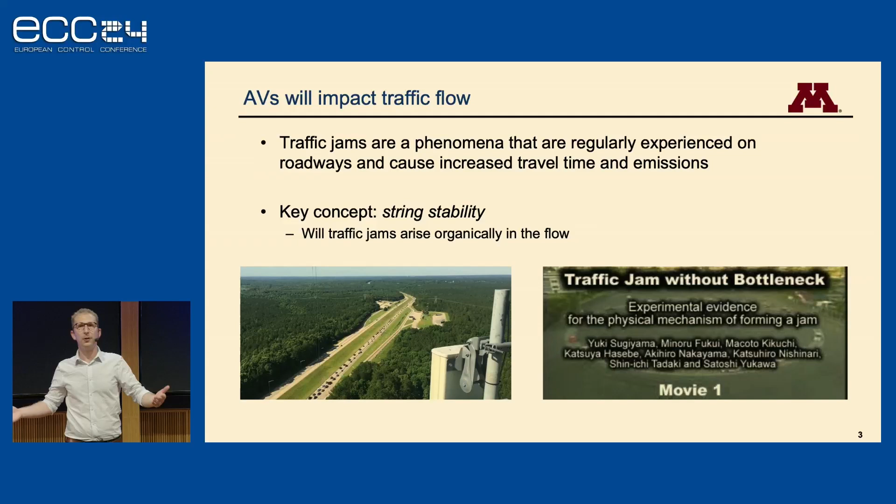We see them here on the left, happening on an open road in the wild, as I like to say, and then on the right in an experiment. You might have seen this video before. It's a group of researchers in Japan. I love this. Traffic engineers were debating over whether or not these phantom traffic jams were real things.

A group of physicists said, let's just do an experiment and see what happens. And so they came up with this setting where you have sort of no external factors. It's just pure traffic. Infinite traffic. It's a ring of 22 vehicles. They start at the same speed, same spacing, so at like an equilibrium flow, and relatively quickly the stop-and-go wave emerges. And what's really happening here is what we call string unstable traffic.

And the question of string instability is what happens to small perturbations from an equilibrium flow. The equilibrium flow here being all the vehicles driving at the same speed and same spacing, so 0 acceleration, and then you see one perturbation. I think there's a common misconception. It's not the question of what happens to the individual vehicle. Naturally, any reasonable driver is going to return to their original speed, keep driving. That's not the question of string stability. That's sort of maybe some sort of asymptotic stability of the driving.

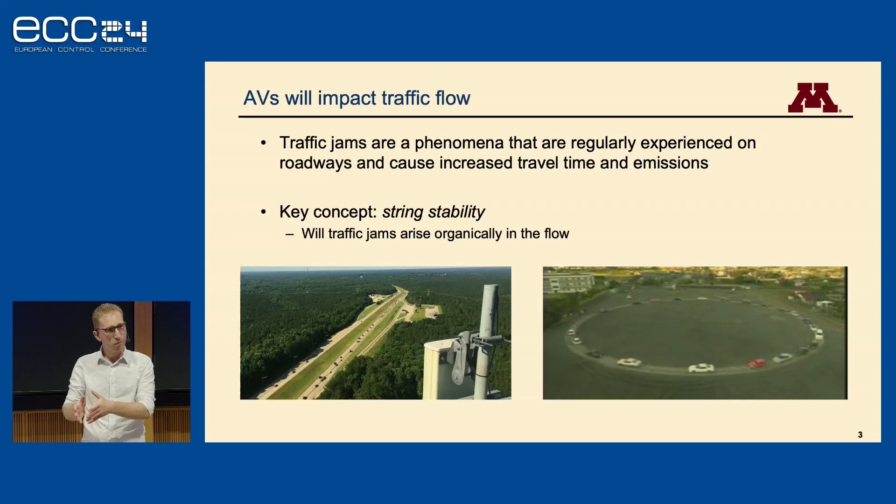The question of string stability is what happens to the perturbation. And so in string unstable traffic, you can imagine that initial small perturbation amplifies from vehicle to vehicle, even though each vehicle originally goes back to that equilibrium flow, the perturbation amplifies, as opposed to string stable traffic, where that initial perturbation is going to dissipate.

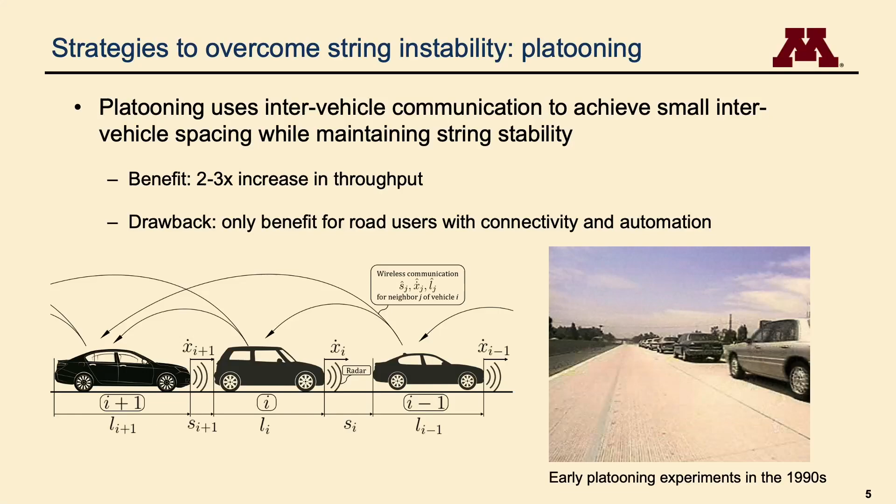And the benefit here is really clear. These vehicles can drive much closer together, can brake very suddenly, so safely do that. You see 2 to 3 times increase in throughput. From a traffic or transportation management perspective, that's amazing. You've basically built a road on top of a road on top of a road without actually building any new road. Without paying for any new construction, you use technology alone to triple or double your capacity.

That's huge. But the drawback, and this sort of gets at my overarching theme here, is it's not for everyone. It's for those who have platooned vehicles. And in fact, one of the ways to address this, if this does happen, there's a lot of proposals for dedicated lanes for platooned vehicles, which is great, again, if you have one, but not necessarily great if you're just a regular person stuck in your regular car like I am.

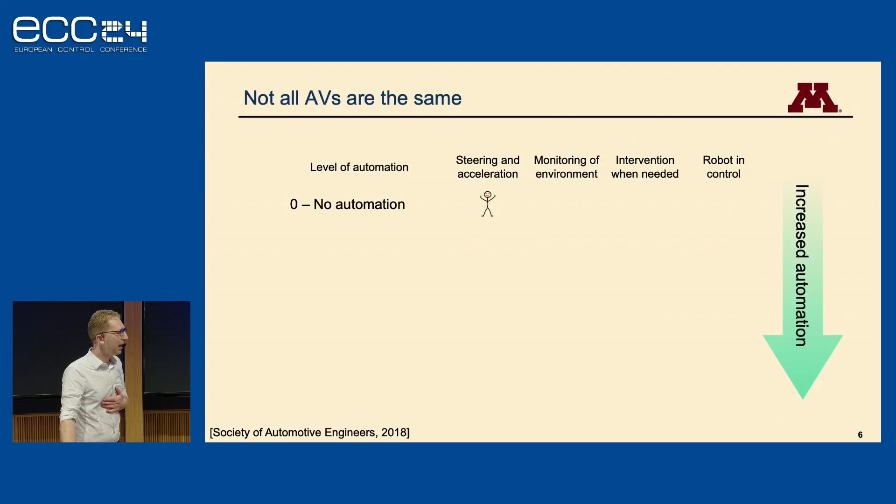So I think this is an important time to differentiate between different types of automation. I've used the term automated vehicle very loosely in the first 5 minutes here, but I want to define that a little bit more concretely. You may have seen this before, but there's basically 5 different levels of automation. There's level 0 automation, so I guess 6 in total. That's what I personally drive. That is your regular car. So steering, acceleration, that's the human driver. Monitoring the environment, that's the human driver. If something goes wrong, I'm there to slam on the brakes or swerve to avoid hitting something. There's no robot in control.

As we go to low-level automation, level 1 driver assistance, we start to take some of those driving tasks and hand them over to the vehicle. And as we go up to higher and higher levels of automation, we're handing more and more of those driving tasks over to the vehicle in more and more driving contexts, so in more and more situations. All the way up to level 5, full automation. This is where I think a lot of those benefits are being talked about. That's sort of the Google car. There's no steering wheel anymore. You tell it where you want to go, and it takes you there.

OK, so while these higher levels of automation may happen a little further down the line, they're not really here yet. And so the first question I want to look at is, what's going to happen with these lower levels of automation? How will they impact that general traffic experience for all drivers on the road? And then how do we address that with lower levels of automation? Specifically, I'm really interested in levels 1 and 2. A lot of people say, well, these are kind of boring.

They've been around for a while, things like adaptive cruise control. Again, you're taking some of that driving and handing it over to the vehicle. And the question is, how does adaptive cruise control impact string stability? Now, if you had attended ECC maybe 15 years ago, you would have probably seen a talk that says adaptive cruise control is very easy to make string stable.

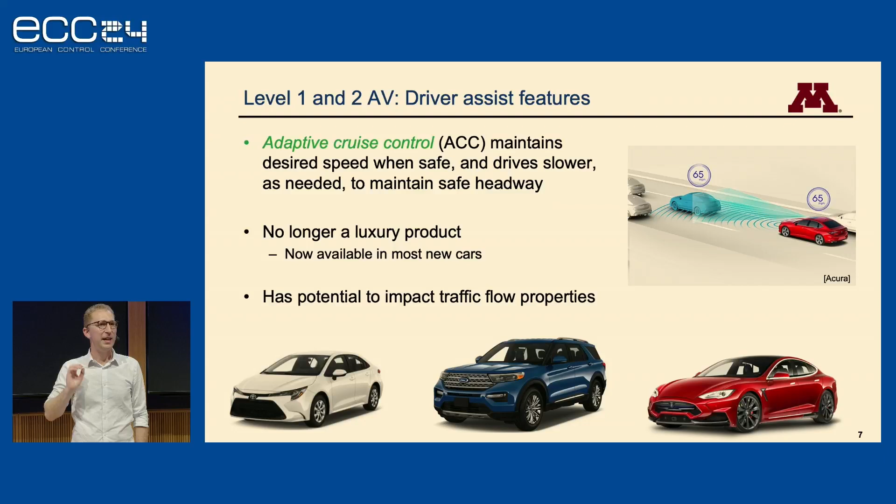There's a rich body of literature going back to the 90s, really, that looks at string stability and adaptive cruise control. And it turns out that these systems are relatively easy to make string stable. So they will not amplify perturbations, and they will nicely dissipate perturbations.

OK, so the first question that I had a couple years ago was, OK, but when I rent a car with adaptive cruise control, I don't like the way it drives. I don't actually think it's doing what the literature says it ought to be doing. And so in order to ask that question of how will these vehicles impact traffic flow, we need to first be able to look at a vehicle and say whether or not it's string stable based on its behavior.

I'm going to just go through a little bit of background on traffic modeling and background on string stability analysis to have the computational mathematical tools to be able to analyze these vehicles for their string stability behavior. So in order to model traffic flow, engineers love these things called microscopic car following models. You might just think of them as an ordinary differential equation that describes the acceleration of a vehicle as a function of the state.

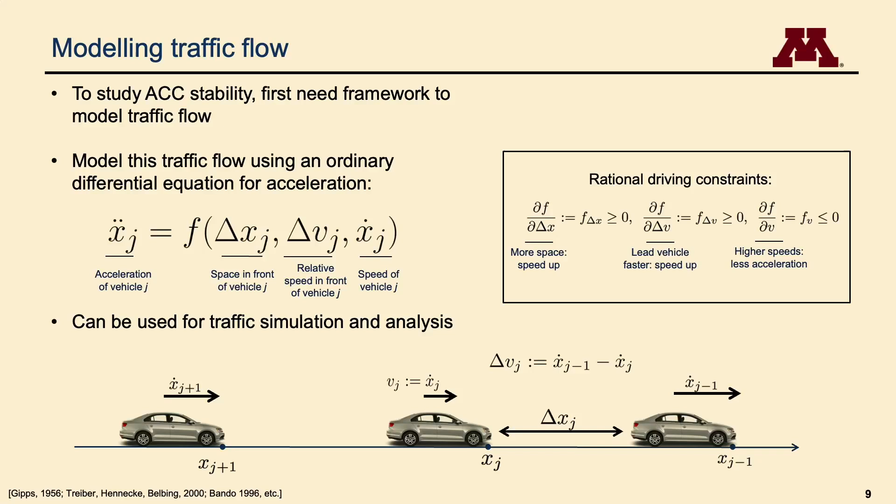And the state is the inter-vehicle spacing, the spacing between the vehicle that we're looking at and the vehicle in front of it, the relative speed, so the rate of change of that spacing, and the speed of the following vehicle itself. And for vehicles that drive like normal vehicles, they slow down when they get closer to the vehicle in front of them, et cetera, it turns out that we can look at that equilibrium spacing, where they all have the same speed, same spacing, i.e. no acceleration, and look at what happens with a small perturbation from that equilibrium spacing, and we can look at how that propagates from one vehicle to the next.

What we're going to do is basically linearize around that equilibrium and then observe what happens to that perturbation. And skipping a couple of steps, it's relatively straightforward, but we get to this really nice result that says that if we look at just the partial derivatives, if you're comfortable with a linearized stability analysis, we can very easily compute whether or not this particular vehicle is string stable. All we need is the car following model that describes the vehicle. If we have that, we can easily run this stability analysis and say whether or not it's string stable.

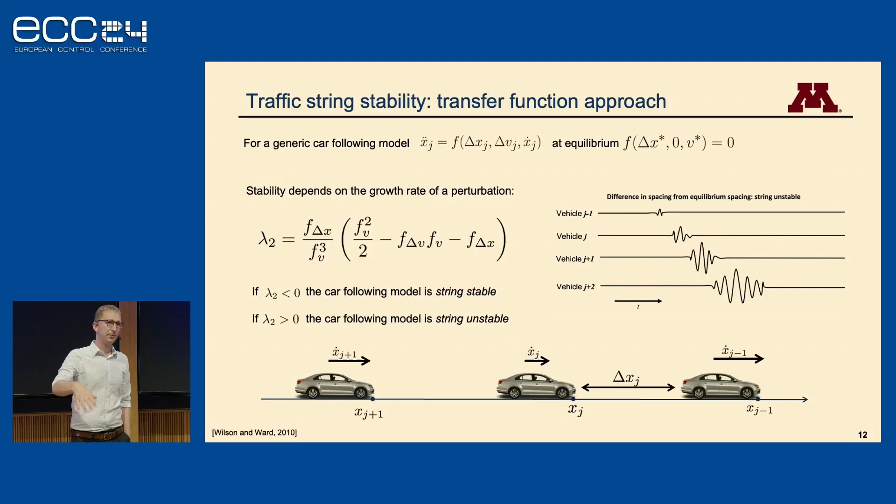So the next thing we need to do is build car following models for these vehicles. The idea is basically not to capture what's programmed on the car, but to capture how the car actually behaves, right? And there's a difference there. There's a lot of nonlinearity in things like the engine, the transmission, et cetera. And so even though the car might be programmed with a certain PID or maybe more fancy control, that's not necessarily the behavior that we observe. So we need to come up with a model that nicely describes that, and then calibrate that model based on real driving data.

OK, so the model that I'm going to use here is one that's really common in the literature. It's an optimal velocity model with a relative velocity term. Some people call it a constant time headway model. If you learned to drive and were told to always leave a 2-second time gap or a 3-second time gap between you and the vehicle in front of you, you learned this model effectively, right? You learn to keep a 2-second rule.

And if you look in the literature on adaptive cruise control, a lot of the controllers are based on a constant time gap policy. So this is a pretty common assumption. We collect a bunch of data on this. So what we do is we have a lead vehicle that drives and a following vehicle that follows with that ACC turned on. And it's just following the vehicle in front of it with its adaptive cruise controller.

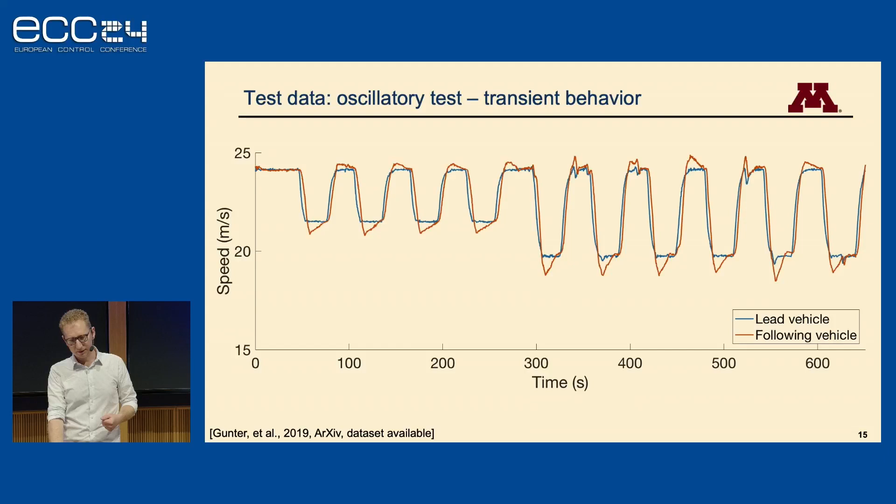We get GPS data for the lead vehicle and the following vehicle, and so we can see the spacing, we can see the speed of each vehicle, compute the relative speed. So if you look at the data, you see small speed fluctuations for the lead vehicle, you see what the following vehicle does, and then for another example, and then you can calibrate this type of model.

And I've done this for probably about 8 or 9 different vehicles at this point. And when you look at the calibrated models, you can then look at the string stability of those models, and it turns out that basically all the vehicles I've looked at are string unstable. So that's the best way I have to convey that.

There is a little bit of good news here, and that is that I've recently looked at a couple of electric vehicles, and it turns out that for those vehicles this is basically not true. Those things are as close to string stable as anything that I have seen. I have some speculation as to why that is.

I think part of that is you're cutting out a whole bunch of nonlinearity in the engine dynamics and the transmission dynamics. You also have basically full torque instantaneously. And so you can much more precisely drive these controllers that were intended to be string stable. Though I'm open to discussion and learning if somebody has a better hypothesis.

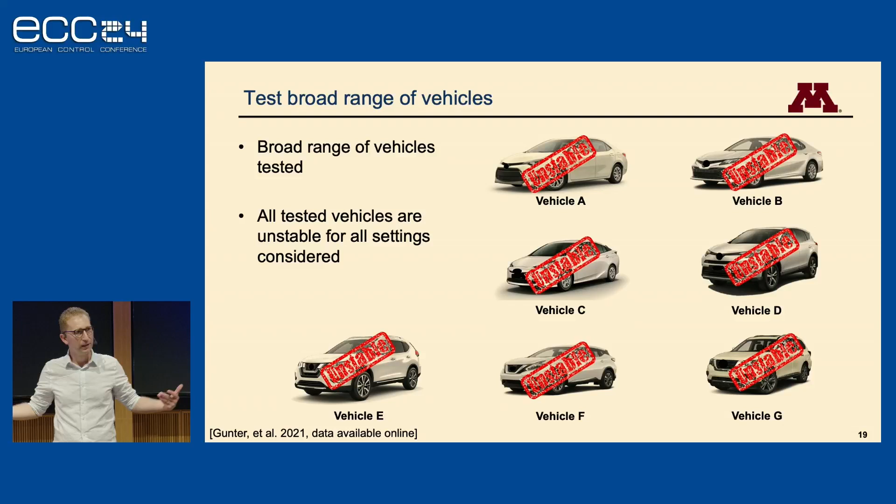OK, so now let's get back to the big question of what does this mean for everyone in the traffic flow? What does this mean if you're driving in the traffic flow, you don't have an adaptive cruise controller, you didn't pay up to get that feature, what does this mean for you, right? What does this mean from a general population perspective?

So we can look at this in simulation. We have now built these very accurate models that nicely describe how they behave. So let's look at what happens in simulation. We look at both the theoretical, what the literature says adaptive cruise control and automated vehicles ought to behave like, and the models that represent the realistic car following behavior of real adaptive cruise control vehicles.

In order to understand these, I'm going to go on a small detour into a little bit of traffic flow theory. Again, this is a tutorial, so I'm trying to bring in some ideas that maybe you've seen, maybe you haven't. But to describe traffic flow and traffic behavior, we look to the 1930s when Bruce Greenshields, at the University of Ohio, had this idea that the speed that traffic is traveling at ought to depend on the density of vehicles on the roadway.

Now, this was the early 1930s. There were not a lot of vehicles on the roadway. So he went out and collected data with a camera where he took pictures to estimate how fast the vehicles were going and what the density was. And he got a lot of low-density measurements and one high-density measurement. And he did what any good engineer does: he drew a straight line between them. And he came up with this speed-density relationship.

Now, flow is speed times density, which means that if you have a linear speed-density relationship, you're going to have a quadratic flow-density relationship. Most engineers, though, looking at data, say it's probably something closer to triangular. But either way, at different densities, you have different flow.

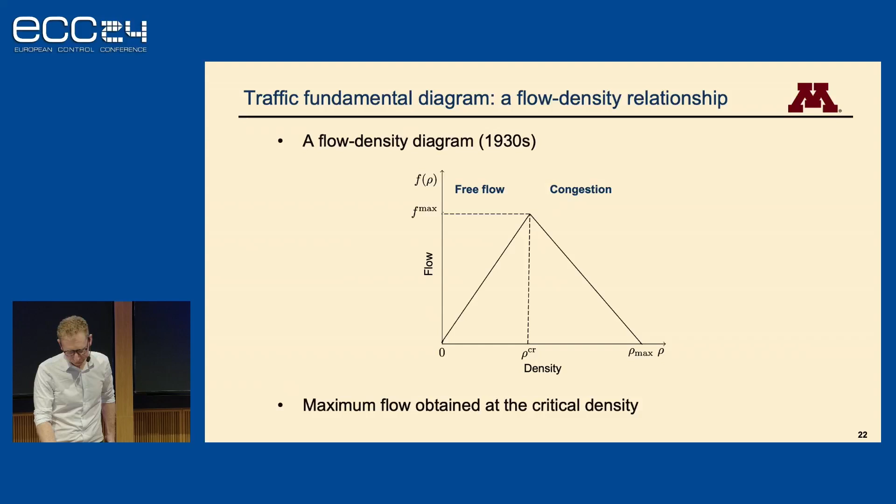OK, so with this in mind, I want to look at fundamental diagrams for different market penetration rates, or different percentages of vehicles with different types of automation, and see what happens. If we look at fully automated vehicles, it's hard to tell, but you do see a small increase, and that is consistent with the literature. These are models that behave like what we are told to expect fully automated vehicles to behave like. And sure enough, we see an increase in capacity. If we look at the adaptive cruise control vehicles, so this is 0%.

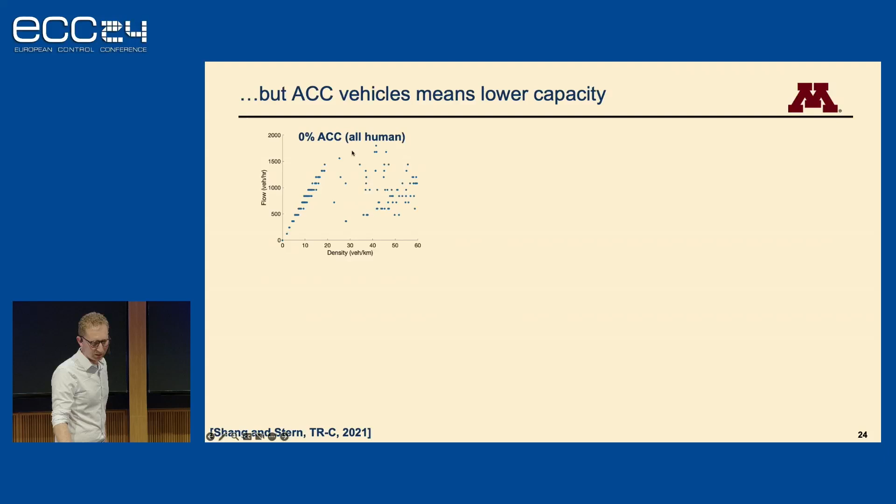This is all human-driven. This is sort of what you would expect. We see our nice free flow regime, our congested regime, and a capacity somewhere around here. And if you look at higher percentages of commercially available adaptive cruise control vehicles, what you see is two main things. You see sort of a collapse of that fundamental diagram, which means that the maximum roadway capacity goes down

by maybe 20, 30%. And the critical density, i.e. the density at which congestion sets in, moves to the left. So at lower densities, because these things are quite conservative, we start to see congestion arise. So that's quite different from the promise that I made of 2 to 3 times capacity with these vehicles.

OK, so the next thing is I want to sort of review what's been done to get towards that. And so the idea is we want to drive the AVs to be better. Right? We want to drive them so that they improve the traffic and don't necessarily make it worse. OK, so in order to do that, we need to come up with a model. And the other thing that we want is we want them to drive not too differently. If they drive too differently from humans, they're going to do something that's weird.

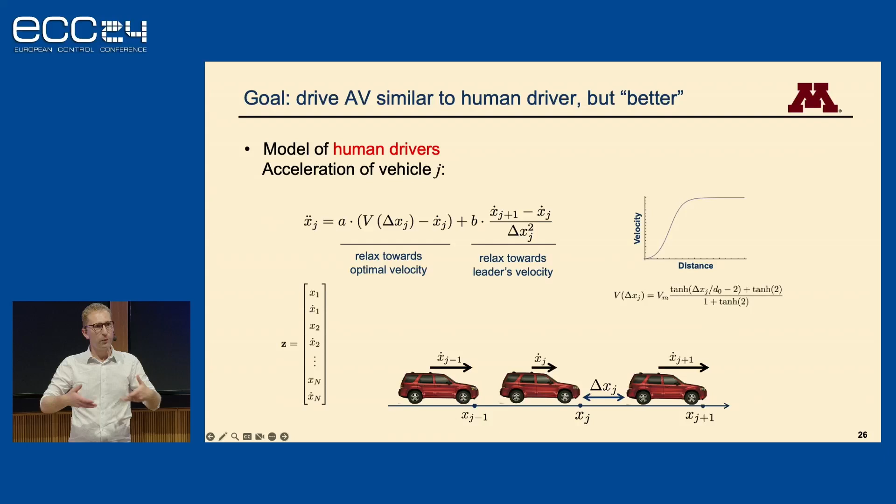So we're basically going to start with how we observe humans to drive, and then just add a feedback control term. So this might seem like it's cheating. This is pretty straightforward. To drive with some desired or equilibrium speed. So we want to look at what's the average speed of traffic, and then we want to kind of maintain that speed.

And if you look at that same ring road scenario that I showed you originally, this is actually a really straightforward sort of intro to controls type problem. It just becomes pole placement, basically, right? You pick your gains, and you're off to the races. OK, and it turns out that this is a really easy stabilizing control. And if you implement this in simulation, this actually works really nicely.

So on the left-hand side, well, all the vehicles are the same. And you'll see that relatively quickly, those same stop-and-go waves emerge. It's just because we've calibrated those vehicles to drive like they do in reality, or observed. On the right-hand side, that blue vehicle is autonomous capable. Currently, it's switched off, and you see those same waves emerge.

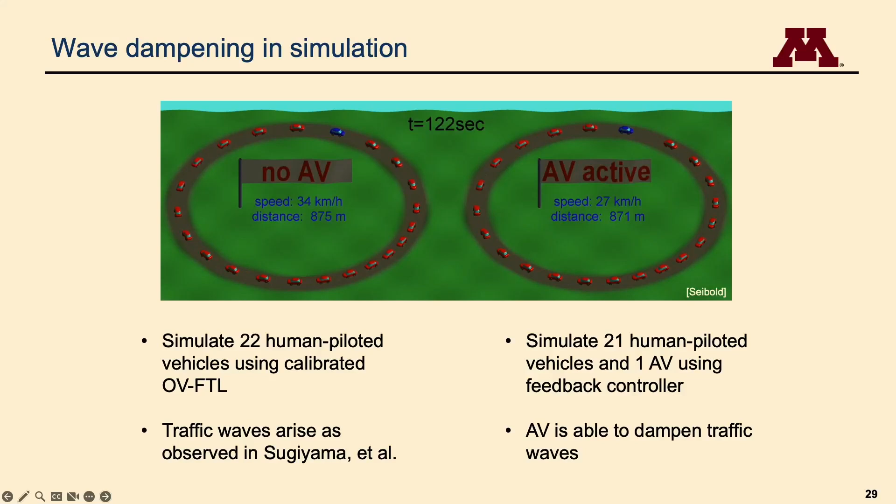And then in a couple seconds here, we're going to switch it on. And you'll see that it's going to drive with that feedback controller that we saw a minute ago. And it's going to relatively quickly stabilize that flow of traffic. And so now we've turned on the AV. And what you see is it got turned on at a very opportune time. And so it didn't race to accelerate to catch up with the vehicle in front of it. Instead, it sort of slowly accelerated towards its desired speed and then stayed at that.

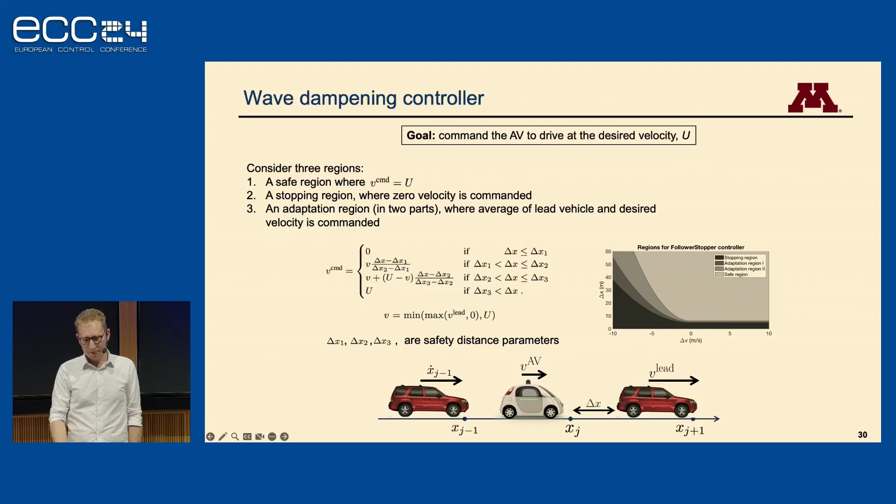OK, the reality of how to implement this on an actual vehicle is a little harder. You can't quite do that. And so a couple years ago, I worked with a number of folks, some of whom I believe are in the audience, to design controllers that could actually be implemented on actual cars. One of the challenges is that on most vehicles, you can't implement an acceleration. Those are all acceleration controllers. Most of what you see in the literature is acceleration-based controllers. But you have to implement a speed. But we were able to come up with something that, in spirit, really captures the same behavior.

And the result, I'm just going to show you the video that describes this, is we redid that ring road experiment. Very similar to the simulation I just showed you. The vehicle with the arrow on top of it is autonomous capable, but it starts without autonomy. So it starts as a human driver. The speeds are at the bottom. Relatively quickly, those stop-and-go waves emerge. At this point, we've activated the autonomous vehicle controller, and it very quickly is able to do what it did in simulation and smooth the traffic.

And so when we look at the results, at the top we have what traffic engineers call a space-time diagram. It's just the trajectory plots of all the vehicles. You can see very nicely here where those stop-and-go waves emerge. And then once we've activated the vehicle, we have that smooth flowing traffic. And this has pretty big implications. This is back towards improving the traffic for all. We've changed the behavior of one of the vehicles on the road.

And we've then changed the traffic flow for everyone. On that experiment, we actually had little sensors on each of the vehicles that measured the onboard OBD2, onboard diagnostics. So we're getting real-time fuel consumption information from each vehicle. And the reduction in fuel consumption was kind of surprising.

So unsurprisingly, you see a small increase in throughput. On average, the vehicles are going faster. You see a decrease in braking, which is sort of like a proxy metric for safety, right? Harsh braking events mean that if you hadn't hit the brakes, you would have had a collision. But what was really most astounding to me was the reduction in fuel consumption. We saw a nearly 40% reduction in fuel consumption.

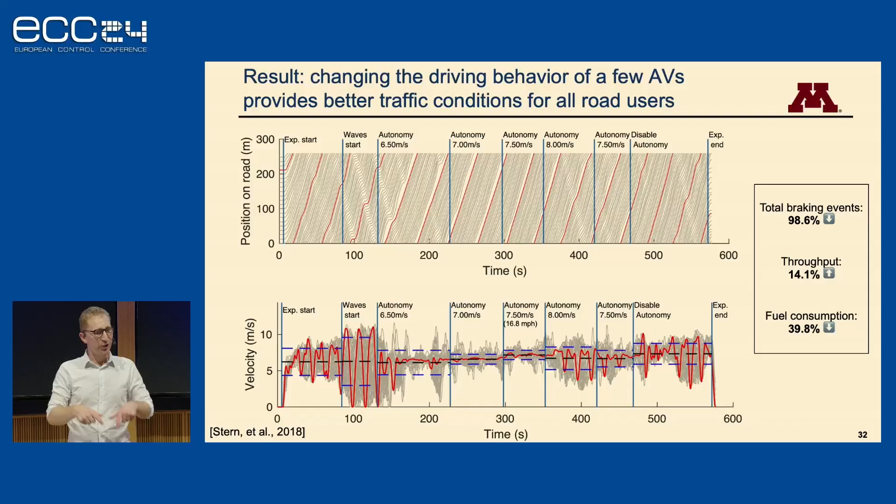OK, I've got about 5 more minutes, but I should probably leave a couple minutes for questions, right? OK, so the next thing is, what about our legacy infrastructure, control infrastructure? Traffic flow will change, right? Whether it's ACC vehicles or highly automated vehicles, traffic flow will change. Our control infrastructure is built for a certain type of traffic flow behavior. How do we modify that to stay relevant and provide benefit not just to the people in the automated vehicles, but to all the road users who are using the highway?

And so the vision that I want to briefly present here is we need to fight congestion with the AVs we have, not the AVs we want, right? So ideally, we would be able to somehow observe what the traffic dynamics look like, so who's in the flow, then, based on the current makeup of automated and human drivers, what do we expect that fundamental diagram, that flow density relationship, to look like?

And then whatever control infrastructure, here I've shown ramp metering control, but whatever control infrastructure you're interested in, you can then modify based on the current observed flow density relationship and not some static flow density relationship that comes from the last 20 years of observations, which is what's done today. OK, in the interest of staying on time, I'm going to go a little faster in the next couple of steps, but I'm happy to answer any questions at the end.

OK, so let's imagine that we can do this. This first part, just imagine we can do this. We can look at the flow based on how they're driving, identify what type of vehicle they are. Are they automated or are they human driven? There's a lot of ideas for how that might happen. But imagine we know that X percentage, 20%, 30% of vehicles are automated, now what?

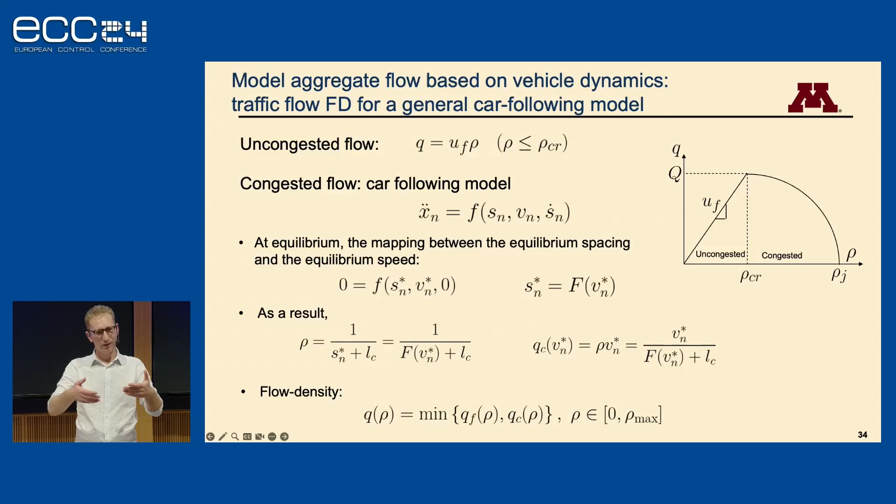So we need to be able to come up with some sort of joint flow density relationship for that composite flow. We can look at an average density based on the fraction of vehicles of each type, and then, and I'm going to skip through this relatively quickly, come up with a combined flow density relationship where the flow depends not only on the density of vehicles, like it does now, but also on the fraction of vehicles that are automated.

So what we have is effectively like a three-dimensional fundamental diagram. We have a flow that depends not only on density. So if you slice it right here, that's just your standard flow density relationship, but it also depends on the market penetration rate of automated vehicles. In this case, I've represented it for ACC vehicles, so it kind of decays. But if you imagine fully automated vehicles that we might have in the future, this would increase with higher penetration rates of automated vehicles, right?

And so now, as an example, let's just take your standard ramp metering control. That's a pretty standard control.

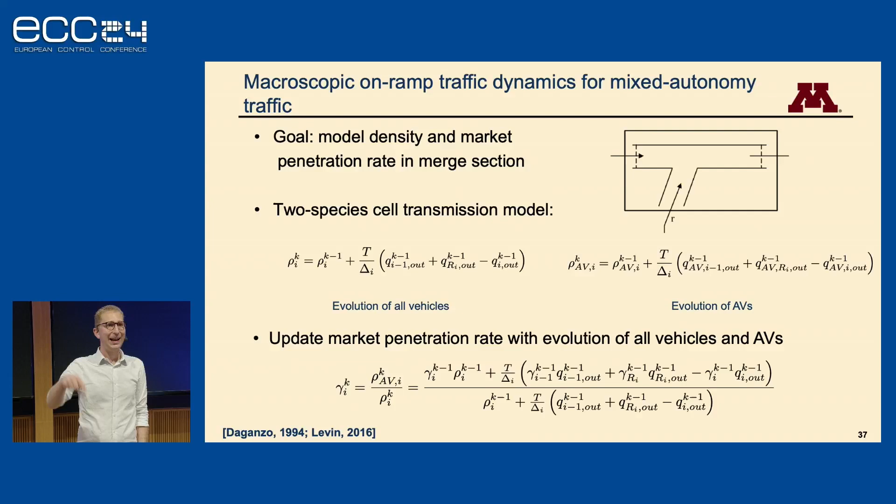And modify it to not just look at a static target density. The idea behind ramp metering control is basically that it's a feedback control where we control the on-flow of traffic such that the resulting downstream flow rate is at or below the critical density, that transition density from uncongested to congested traffic. And instead of looking at a constant critical target density, we can look at a target density that depends on the market penetration rate of automated or adaptive cruise control vehicles.

So now we've basically switched this to have a market penetration rate dependent critical density. So I'm going to look at three different scenarios. One is uncontrolled, so that's just allow whatever can get on the ramp. That's no ramp metering. Then scenario 2, which is controlled, but assumes a fixed fundamental diagram. And the third scenario is controlled with a market penetration rate dependent fundamental diagram. We implemented this in MATLAB very simply here. Excuse the graphics. But I think the result is at the bottom.

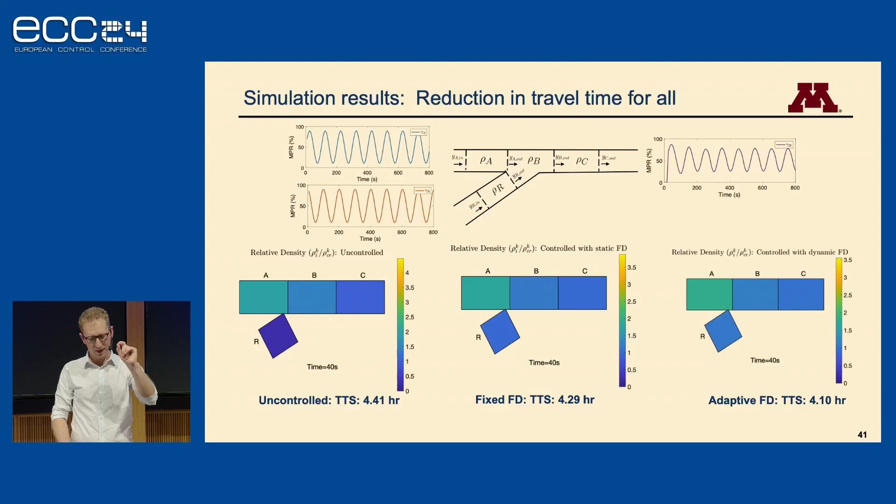So uncontrolled, unsurprisingly, if you look at the total system travel time, or the total time spent, rather, we see about 4.4 hours. And we can reduce that down to about 4.3 hours with simple ramp metering. And we can reduce that down another 4% or so if we look at the market penetration rate dependent fundamental diagram.

And if you look at the densities, you see that basically you go into congestion with uncontrolled, and even with controlled if you're using the wrong static fundamental diagram. But if you use this adaptive fundamental diagram, even that simple feedback controller is able to nicely avoid that congestion scenario.

OK, so in summary, I think increased vehicle autonomy will change traffic flow dynamics. That will have an impact on not just the road users who are in the automated vehicle, but also the road users around them, because they're stuck in the same flow. Remember, you're not in traffic, you are part of traffic. Right? And if other people are driving differently, that's going to affect the traffic that you are part of. So to benefit society, my charge to us is let's think about not just the vehicle occupants, but also the traffic flow around it and how those vehicles impact the rest of the traffic flow.

There's a whole bunch of different games you can play. I showed one example with ramp metering, but I think there's thousands of different examples of how you can think of, OK, how does this change control for traffic systems?

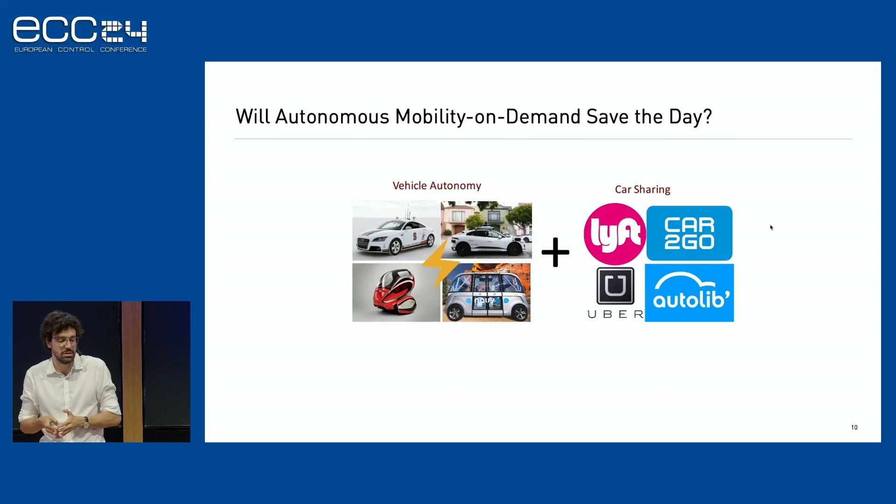So if you combine autonomy, connectivity, and electrification, one of the paradigms that has emerged in the past decade is called autonomous mobility on demand. Autonomous mobility on demand is, very simply said, a fleet of potentially, hopefully electric robotaxis that provide on-demand mobility. And the question is, is this the way to go, especially in urban environments? Will this solve the challenges I've mentioned before?

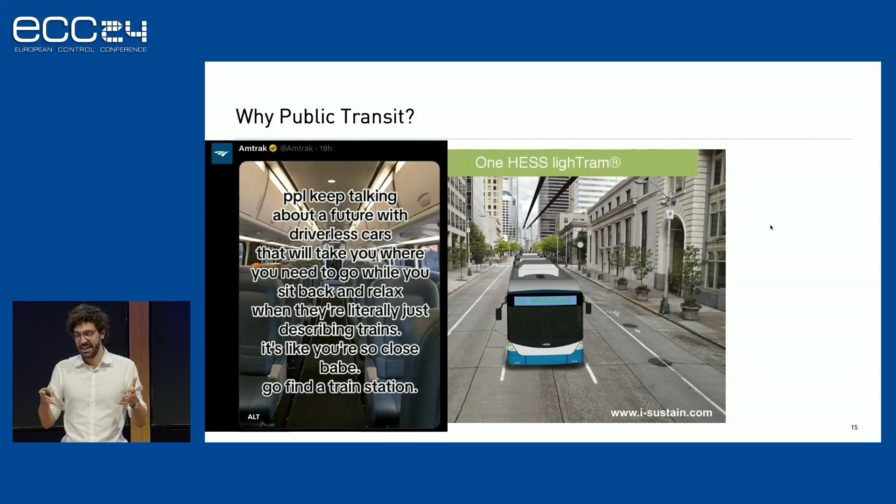However, public transit is not point-to-point. And though it still has these very nice features that driverless cars are promising. This is a tweet by Amtrak, people talking about the future with driverless cars, where you can sit back, relax, and so on. They're talking about trains. You're so close, babe. Go find a train station. Now, if I may say, especially if it's Amtrak, good luck finding a train station. And anyway, it highlights the fact that with public transit you have to go to the train station. So it's not point-to-point. It doesn't pick you up.

There's another dimension, which is the most sustainable way of moving, which is cycling. Actually, I did some back-of-the-envelope calculation the other day to look at the life cycle analysis, so take this with a grain of salt. It turns out that cycling is more efficient than walking, also in terms of life cycle analysis. And it's a great way of moving. It broadens your accessibility range, but of course, not everyone can cycle, and it doesn't cover long distances.

So what I'm hinting at is, why don't we take the benefits of all these worlds and combine them in intermodal mobility ecosystems, which we can call intermodal autonomous mobility on demand systems, where we combine the benefits of all modes within this integrated system. But to understand the potential benefits of this system, we need to start modeling it. And that's what I want to present today in this tutorial.

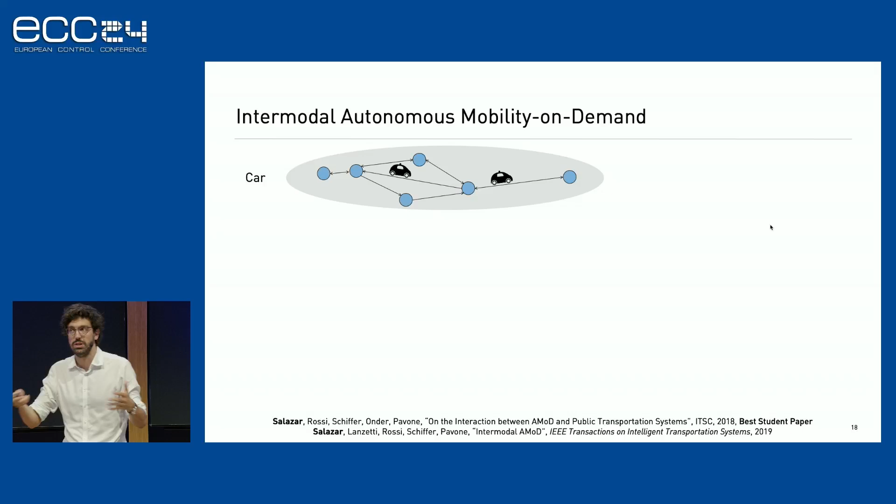The way you can model this system from a mesoscopic perspective for a city is using network flow models. In network flow models, you represent your city as a graph. The nodes are intersections, the arcs are road links. And then you do two things. Since it's a city, you have a lot of flows, a lot of people moving around, so you look at them as fluids, using continuous variables.

Second, we take a planning perspective, which means we look at demand which is time invariant. We look at a snapshot, rush hour, and then you have a continuous flow of users that want to go from A to B, a continuous flow from B to C, from C to D, and so on. It's a steady state. So your metric is users per unit time, vehicles per unit time, because we're time invariant, and again, remember, mesoscopic perspective, therefore we look at flows. Okay?

And you can also add public transit if you want, the same way. Your nodes are the stops, the arcs are the legs in between. You can have also a walking graph, a cycling graph, and then basically model the fact that you can walk, then you pick up a car, it drives you, then you take public transit, right? These nodes may be at the same geographical location, but they're different nodes. And this way, you don't need binary variables telling you whether you're on mode A, mode B, mode C.

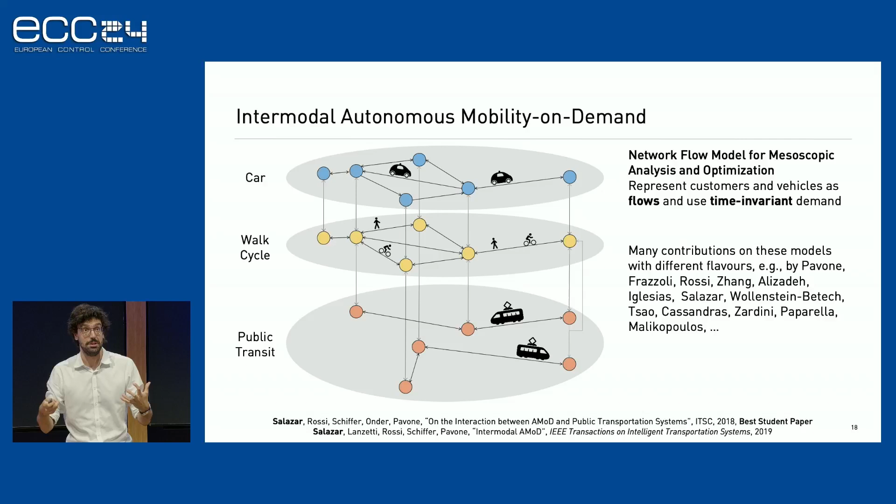And then each of these regions has some demands daily, where people want or need to commute. It can be a hospital, it can be job opportunities, and so on, right? Which we denote with this triple: o_m, an origin node, a destination node, d_m, and a flow. Remember, we are looking at users per unit time, alpha_m, that tells how many people per unit time want to go from o_m to d_m. And these are demands for region R, and we collect them in this calligraphic M_R. And we do it for each region.

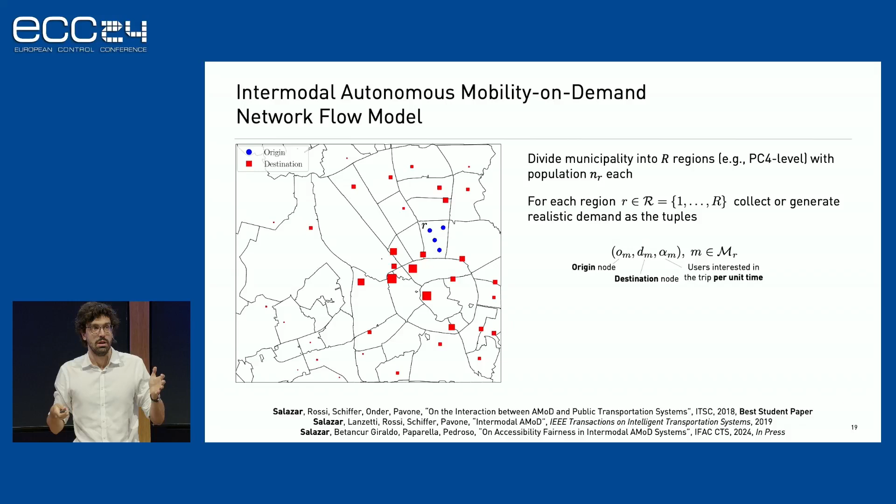Here you can see an example. You have these three origins, and then the squares represent the destinations. You can see bigger squares denoting more people want to go there in the city center, which makes sense, okay? Now, which other ingredients do we need? So another ingredient is travel time. How long does it take you to cross any arc a?

And depending which arc it is, if it is a car road arc, you will look at how fast it takes you by car. If it's a mode switching arc, you can see how long does it take me to board public transit, so how long do I have to wait, and how long does it take me to switch physically. If you keep travel time constant, you can still capture exogenous congestion effects. So if you're in the rush hour, t_a will be higher. If you're not, it's going to be lower.

What we cannot do in the contribution we'll present today is to change t_a as a function of our choices, because we basically break convexity. Yet in other contributions on this topic, with some colleagues, we did manage to create endogenous congestion models. So today, t_a is considered to be constant for the time window we're looking at, okay?

And we need two optimization variables. The first one is a flow vector, which basically tells you for each demand m, how many users are traveling on arc a. We call it x_a^m, okay? So we have a collection of these x^m vectors that tell you where users are going, basically. We have to choose this from a planning perspective. How do we operate the system, right? This also captures the movement of user-carrying vehicles if you assume one user per car, okay?

In addition, we also have empty cars that rebalance themselves, realign themselves to the demand distribution. We model them with vector x^r. Same idea, x_a^r tells you how many empty cars are traveling on arc a, only on the car graph, per unit time. Everyone with me? Okay, good. So these are the two, that's it.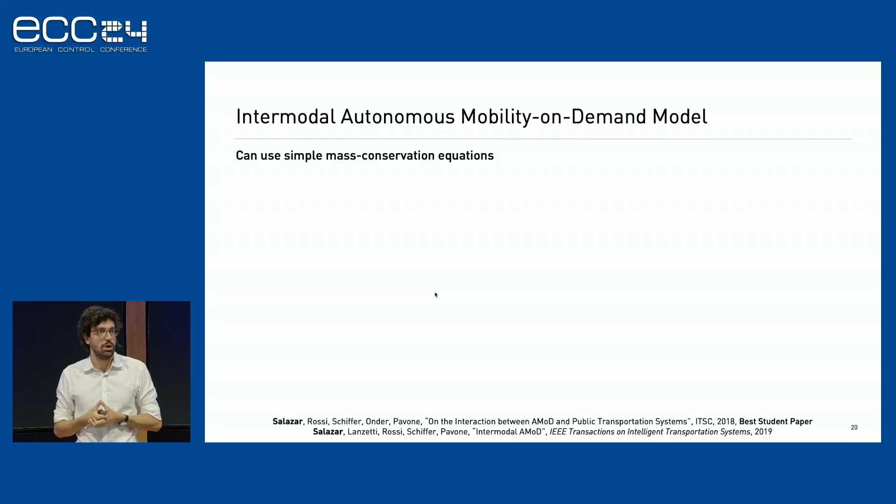Then we apply mass conservation equations with a steady state, right? So for each node j, every user entering it exits it. So these indicator functions tell, okay, if I'm at an origin, I have an injection of users, if at a destination, an extraction of users, and for the rest, I just look which arcs enter my node. Same for the cars, though we keep them in the system, we don't introduce or take them off, just summing over the rebalancing flows plus the user flows, right? Which represent user-carrying vehicles. Flows cannot be negative, pretty trivial. You can also have a bound on the number of cars. So our units are users, or vehicles, per unit time.

If I multiply by travel time, I have the number of vehicles around. And you can also have, which we use in those two papers you can see there, congestion models. So if you want to have a threshold congestion model, linear, you can say, okay, I don't want to increase congestion more than this point. You can use these linear inequality constraints on the graph.

And then what you usually do, you want to minimize how you operate, you minimize travel time, maybe some operational cost, right? And then you find basically the operation. You can see this is overall a linear program. So you can solve for very big cities. We took Manhattan, we took Berlin, and we solved.

And one result I want to show you is what are the improvements if you go from an AMoD-only car operation to an intermodal setting. What are the improvements? And they're gigantic in terms of CO2 emissions, operational cost, and travel time, which tells you in the future, AMoD doesn't have to be something on its own, it has to be integrated within an intermodal mobility ecosystem, okay?

However, I was always wondering, we always look at time is money, and I was always wondering, are we optimizing for the right objective? I mean, if you look at literature, 99% is minimizing travel time. And only recently we've been seeing some deviations from it, and we'll see it also in the next talk. But are we optimizing for the right objective? Is minimizing average travel time what we want to do?

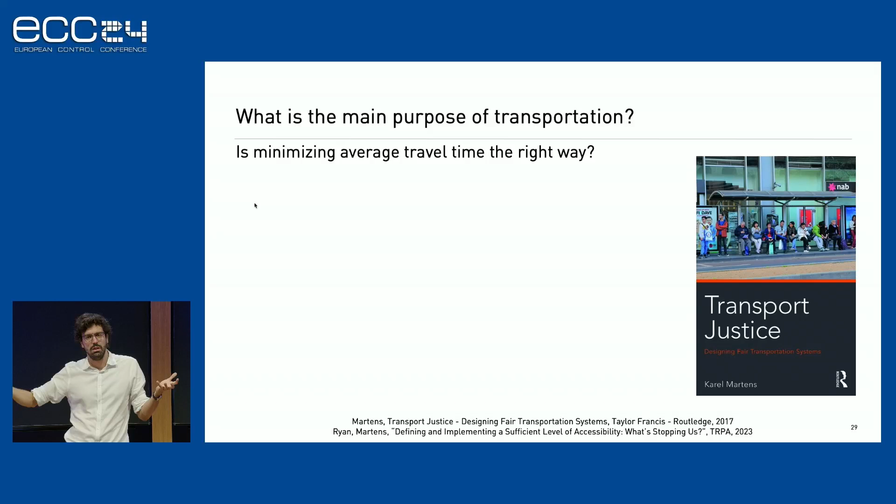So I decided to take a step back, also challenged by great colleagues like Professor Karel Martens from Technion. I wanted to kind of rethink what's the main purpose of transportation. This brings us to analytical philosophy, right? And the concept of justice, which Karel then translated to transport justice. So what's the purpose of transportation? Well, it's to provide accessibility, right? To opportunities, to jobs, to hospitals, and so on and so forth.

What is accessibility? It's freedom to get to places, right? It's a multifaceted, complex concept. It's very difficult to implement. What is very interesting, what in the social science literature is being said, is any simple approach to capture it would already be good. Something that transcends only minimizing travel time would already be good. Okay? And one way could be the number of relevant destinations you can reach within a reasonable time threshold, right? So let's look at it mathematically.

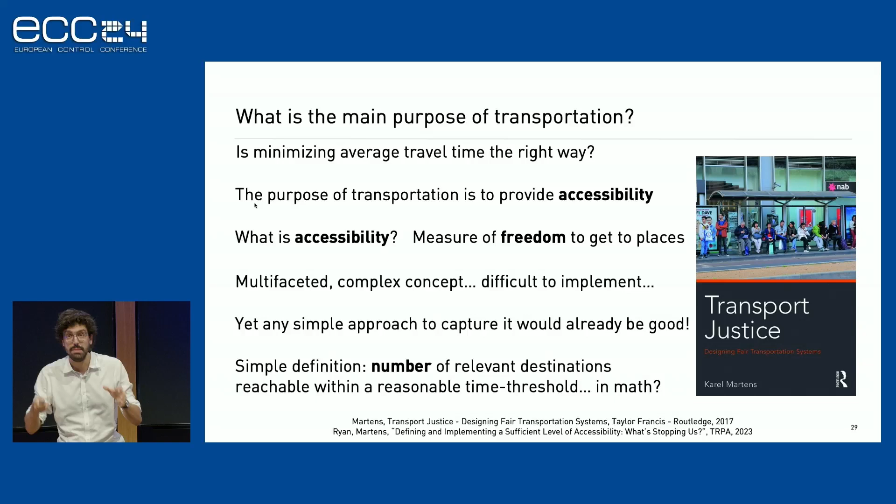Basically, you have a time threshold, Tmax. Let's go back to the engineering world. Okay, Tmax is the maximum we can travel. And then we say, okay, if we have trip m, we have a binary variable, bm. It's 1 if our travel time, which is basically time times the flows by the total flow, is below the threshold, and 0 if you're above. We can do a very nice big-M formulation if we're trying to maximize the number of bm's, right? If bm is 1, the inequality on the right holds. And if not, it doesn't have to hold, right? We sum all the binary variables for each of the regions, and

here comes another aspect. In transport justice, the idea is we want to follow what is called the Foster-Greer-Thorbecke poverty index. And the idea is that we have two regions. We have an insufficiency region where people do not get enough of something, and a sufficient region where, okay, you can let the market play around, but I'm not going to try to improve your situation if you're already doing good enough. So the key word here is sufficiency.

What we want to look at is this accessibility fairness index, which basically captures, okay, do I have access to a sufficient number of destinations, SUF, from an engineering perspective, or not? So we take the maximum between it. Only if we have a deficit, it matters. Otherwise, if you are above it, you're doing well. Society doesn't need to provide for you, okay?

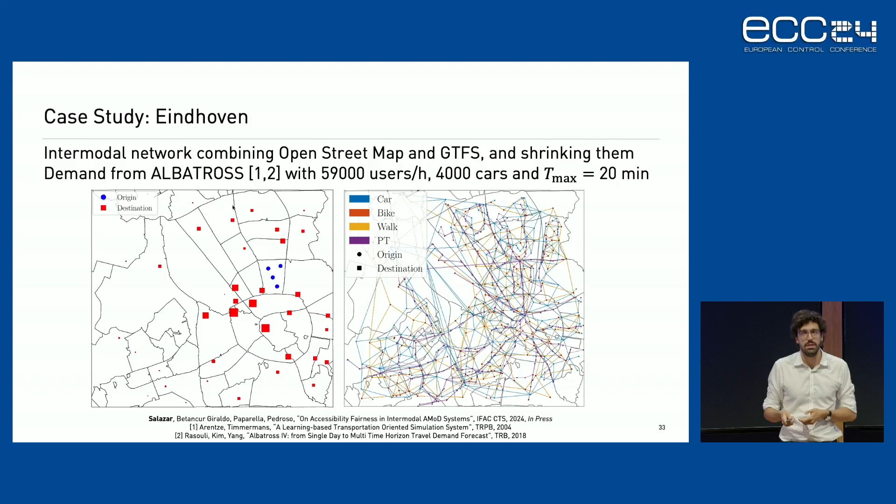On the right, you can see the clustered graph of Eindhoven, the intermodal graph. For some of the data, we set the threshold at 20 minutes, and we have a maximum number of cars. So we want to leverage these autonomous vehicles to provide accessibility, not to minimize travel time. But first, we took the vanilla intermodal problem and minimized travel time, and then checked the accessibility unfairness. And here you can see on a heat map how it looks. Well, if you minimize accessibility unfairness, this is what you can do. You can reduce it significantly.

In this plot, you can see the time-based modal share, how many users have which type of travel time. You can see in black the average travel time when you minimize travel time, and the threshold in green. So basically, these users here have an accessibility problem. These trips are too long. If you minimize accessibility unfairness, you can get rid of it, and the travel time doesn't change. That's the surprising thing. You're not going against it. Just another way of thinking: who do you serve first? Why? Basically just using cars that you were using for trips that were already short to cover a bit longer trips.

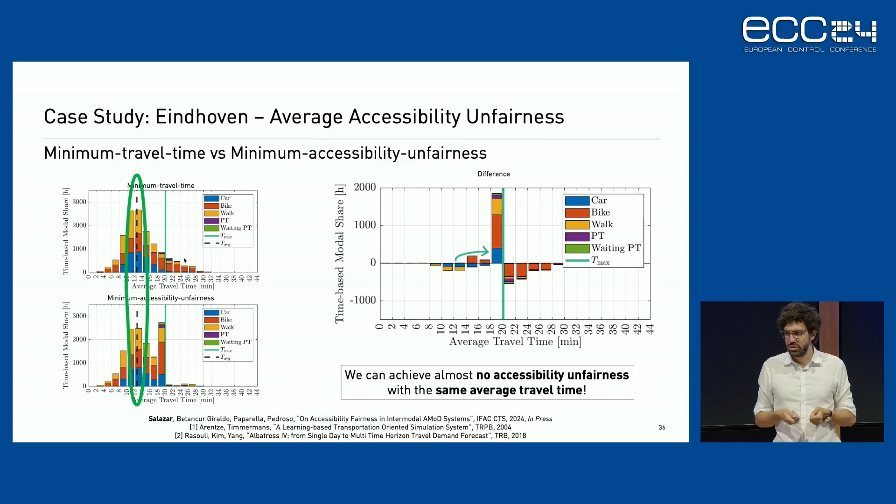You can see it also in these plots. If you minimize travel time, you have in blue a fairly short trip by car; by bike it should take 5 to 10 minutes. And a long trip from Veldhoven to the center of Eindhoven that is covered by bike, that's going to take half an hour. That's not accessible. What you can do is take the cars from the first one, they can go by bike, and cover as much as you can of the second one by car. And that's a very nice idea.

However, when we got these results, we thought, wait a second. We're saying that trip is accessible, even though part of it, the bike path, is not accessible. It's above threshold. So what about path-based accessibility? I think we need to revisit our problem statement. If you look at this, there is kind of a shadow on that term there. That term is basically the extra travel time that you perceive for trip M on average. But if you have multiple paths, then what?

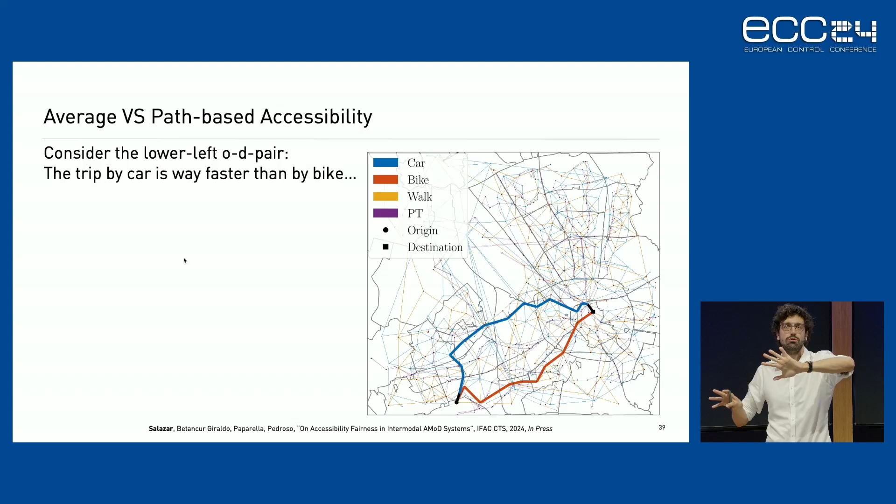Look at this case again. Suppose the trip by car is 10 minutes, the trip by bike half an hour, 50-50 distribution. Well, the average is 20 minutes. We are below the threshold. It's accessible, right? But the bike path doesn't have accessibility. So what? Here there are two, or three, things you can do. The first one I did was despairing, and then realizing it's actually quite interesting. It opens a discussion. If on average you follow these flows, one day you go by bike, one day an autonomous car picks you up, and you can even choose when to do that, then you're actually getting average accessibility, right?

Otherwise, if you really want to reason in terms of paths, and we saw these days that reasoning in terms of paths is a pain in the neck, what you can do is pre-compute possible paths, which we did with and without AMoD, and allocate flows to them. It's probably a suboptimal approach, but it actually works. So basically, you pre-compute the fastest paths. You can decide which ones you want.

You pre-compute the extra travel time, and then the only question you have here is: how much flow do I assign to the AMoD path, and how much flow to the non-AMoD path? These are these two F flows, which are two scalars. And then we still have to decide the rebalancing flows, but the problem is significantly smaller, and we can solve it.

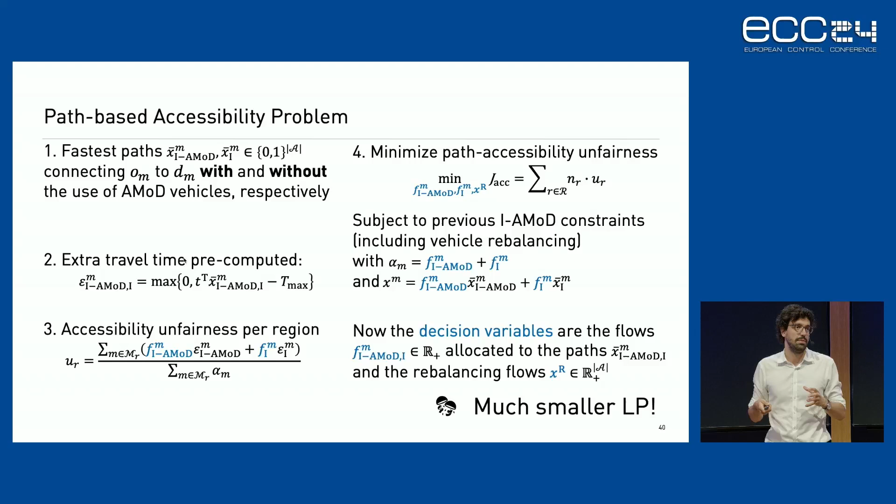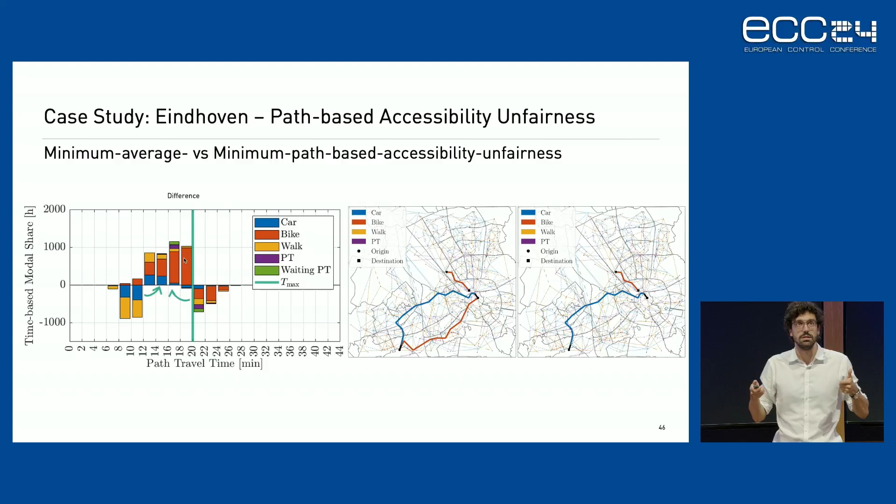If you optimize for path-based accessibility, you can actually resolve that issue, right? And what's happening basically is that you are saying, okay, this trip, the long bike path, is not accessible, so I'm going to do everything by car and take them somewhere else, okay? Make sense?

So what? Here are just two takeaways. Optimizing for average accessibility results in a worse path-based accessibility, if you then look at the individual paths. However, if you could implement it, it would be the best thing to do. If you could realize this maximum average accessibility, maybe with turn-taking mechanisms, it would be great. You would give the most accessibility to the system, and it's more a policy-making question: how can you achieve it? This brings me to the last part, just a couple of minutes.

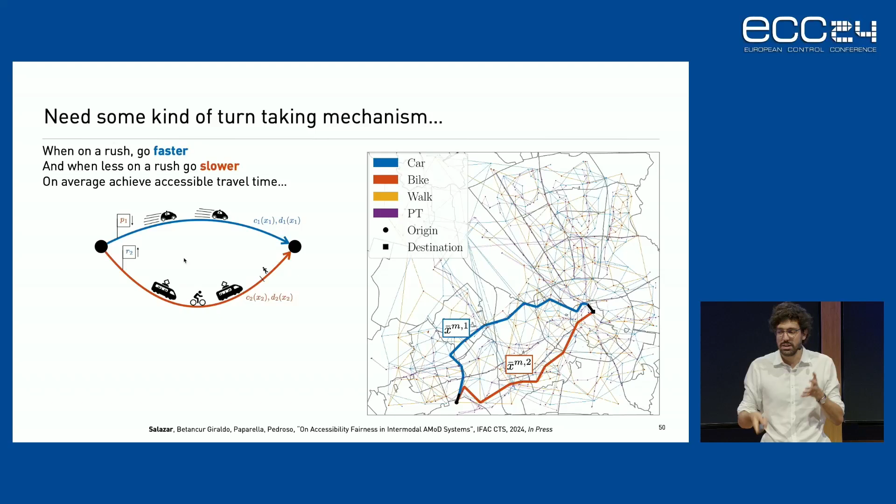Suppose you have these two paths, and you want to take the blue one, the fast one, when you're in a rush, and the red one when you're more chilled, right? And on average, you achieve an accessible travel time. How do you make sure that you can implement it? You could use tolls, but tolls are not fair. You want turn-taking mechanisms. So what you can use are artificial currencies, something we started studying.

The idea is very simple. It's a simple pricing mechanism. If you want to go fast, you pay. If you want to go slow, you receive points. You cannot exchange points, you cannot buy them. It's something on its own, only for your mobility system. And this way, you can achieve it. Here are some results from other papers. When you don't do anything, you are at the so-called user equilibrium, where travel time is almost 30% higher. And as this mechanism kicks in, you get to the system optimum.

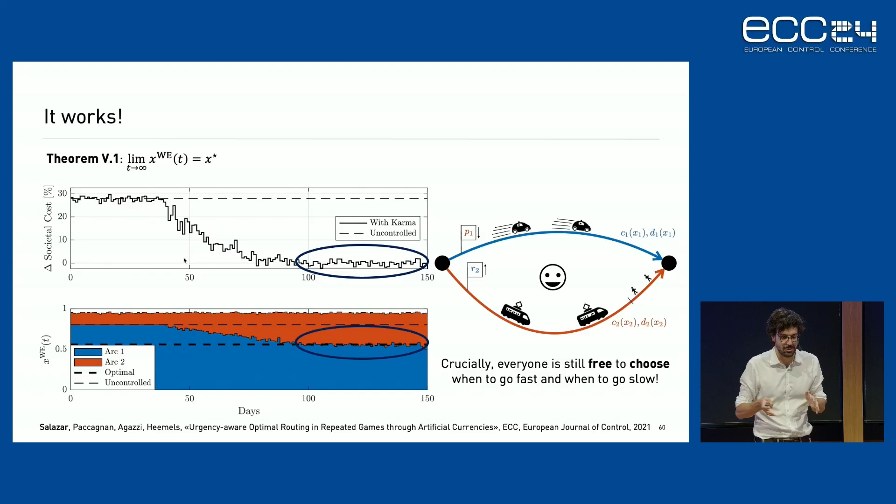It works. And, which is very nice, you are still free to choose when to go fast and when to go slow. So I would even argue your accessibility, and it's a very nice discussion we can open, is even better because you can choose. The day you're in a rush, you go faster. The day you want to chill and enjoy a half-hour bike ride, you can also do that. And you choose just by looking at your portfolio of artificial currency.

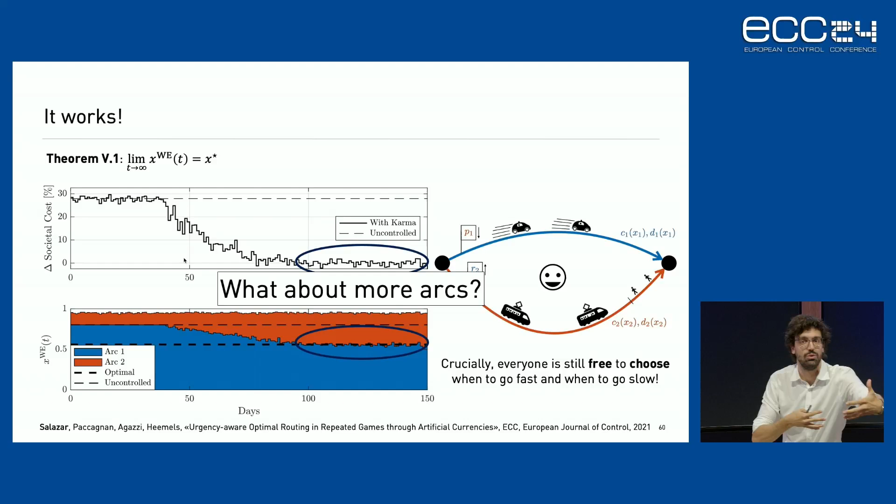You can also do it for more arcs. With this problem, and you can check the papers, it's fascinating. Compared to static tolling problems, which are fairly not so difficult, this is super difficult, because users need to think about the future when deciding: do I go fast or slow today? I have to look at what I expect to do in the future. It's at least a two-step decision process. Multiple arcs also works, same idea. Again, the fact that you can choose when to go fast and when to go slow allows you to further minimize the perceived trip discomfort.

Suppose you've bought an electric SUV or a small electric vehicle. I could give you a fully charged vehicle in the same time. That's equity. Or I can give you the same charging power, and of course, the SUV will take longer. That's equality. And you can design prices for both, and they work. And hopefully at CDC and also CPHS, we will be able to present more.

Last but not least, you could tell me, wait a sec, you're basing this on user decision models. All these pricing things are based on a model we make of the users, but we know that models are wrong more often than not, and we don't really know how people would behave. There's been a very recent paper by ETH based on bidding schemes on this karma, which is a first step we need to do to understand behavior.

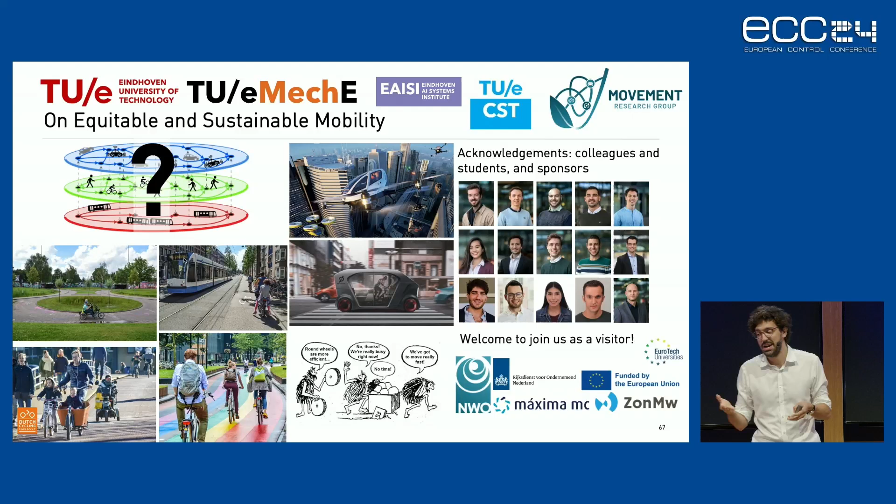And we have a choice. Looking at this picture, you see we have a choice here. You should remember, before being engineers, we are first and foremost humans. So I look forward to bridging this transdisciplinary gap and contributing to science and ultimately, hopefully, to society. Thank you very much, and I'm open to questions.

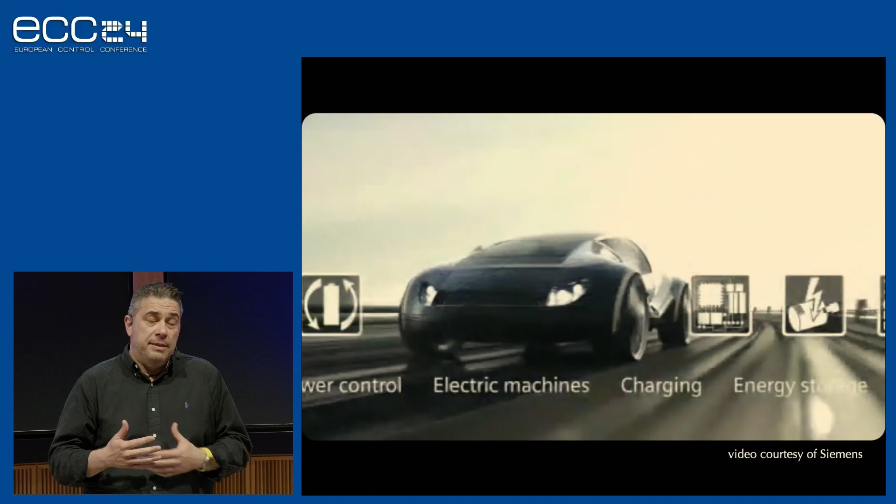So we've seen that emerging mobility systems like connected automated vehicles, shared mobility, electric vehicles can improve transportation efficiency. And transportation is about to get transformed to a new paradigm. We are about to move away from conventional vehicles with internal combustion engines and move on to pure electric vehicles. We will see vehicles being integrated with commercial and residential buildings so that we can have off-grid buildings.

We will see the transportation network being upgraded with fast charging stations and having technologies that can dispatch the increasing electricity demand in an efficient way. And on top of that, we have connected automated vehicles that can exchange information and can coordinate in specific scenarios that can improve transportation efficiency. So this is all the good news about emerging mobility systems.

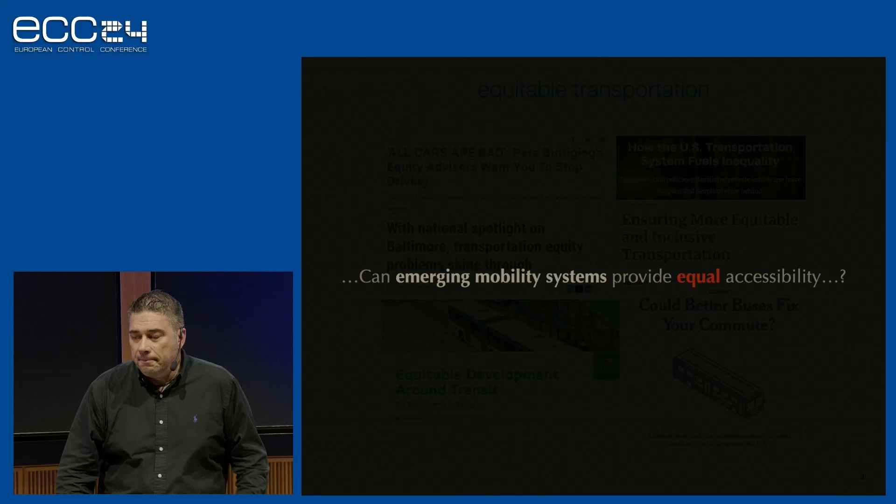But the question that still remains unanswered is, can these emerging mobility systems also provide equal accessibility? Equitable transportation and accessibility remains a pressing issue as we speak, and this hinders access to essential services. There are underrepresented communities and communities who are economically disadvantaged that don't have access to affordable and reliable transportation. There are urban areas where the public transportation is underfunded or poorly maintained, leading to unreliable transportation, and disproportionately, this affects low-income communities and minorities.

So the idea is how we can measure equity. What will be the metric that can help us quantify equity? We are control theorists in this conference, and we like to have a metric that we can use to formulate a nice problem and optimize. So we need to find this metric.

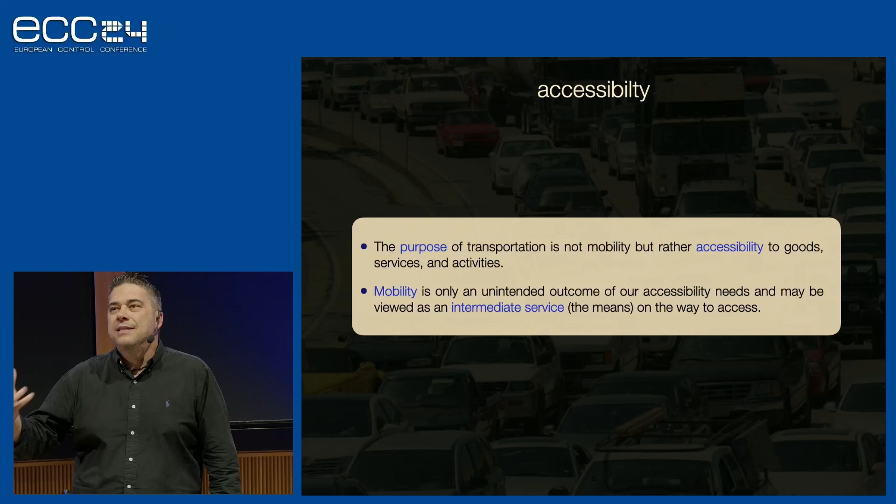But before we get to that, we need to take a step back and look at what is transportation, right? Transportation is not mobility. The purpose of transportation is accessibility. Accessibility to services, to goods, to activities. Mobility is an unintended outcome. It just happened to be there, just to help us get to what we really want, which is access. So mobility is the means, after all.

But at the same time, how can we measure accessibility? There have been several efforts in the literature to quantify and measure accessibility. Some more simplistic approaches essentially take accessibility as the geographical distance between an origin and specific services, mainly employment. Other efforts use isochrones that capture the geographic areas that can be accessed with a specific mode of transportation within a specific time threshold. Others have introduced the accessibility index that takes into account the walking distance from an origin to a public transportation station and also the waiting times and so forth.

However, these efforts do not capture the disparity in accessibility that goes across different socioeconomic backgrounds and geographic regions. To address this problem, there have been other efforts that try to quantify mobility equity. And you can see that there are typically two dimensions, the horizontal equity and the vertical equity. In horizontal equity, the problem is to address equitable treatment of travelers with the same sort of needs, but they don't take into account any socioeconomic or geographic factors.

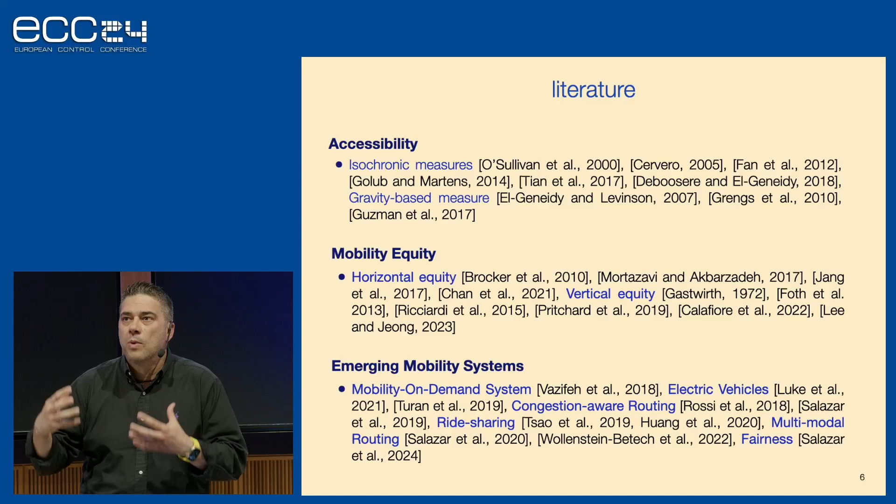In vertical equity, the focus is to assess equity in transportation and essentially address the low-income based disparities in accessibility, mitigating the financial burden related to the transportation cost for low-income households. There have been also some other efforts in emerging mobility systems like shared mobility and what Mauro talked about, fairness. But still, there is a metric missing from the whole picture that can help us quantify equity and help us improve equity, as a matter of fact.

So if we want to think about this metric, what would be the features that this metric should have? First of all, it should capture multimodal transportation, in any city of any different size, right? That would be the first asset. Then, of course, it should address accessibility, cost, but also some societal aspects. And at the end, it should use only publicly available data. You can't really rely on a metric that depends on private information and private data.

Regarding the data, for the metric that I will introduce in a while, essentially we use two types of data: the point of interest data and the isochrones. In the point of interest data, we have geographic areas that include all the types of services that you can find in this area. For example, groceries, financial services, medical facilities, restaurants, coffee shops, you name it.

And then the isochrones essentially are maps that depict the areas that you can access with a specific mode of transportation and within a specific time threshold. So by superimposing the isochrones with the point of interest data, you can have a nice map that tells you how many services you can access with a mode of transportation within a certain time distance.

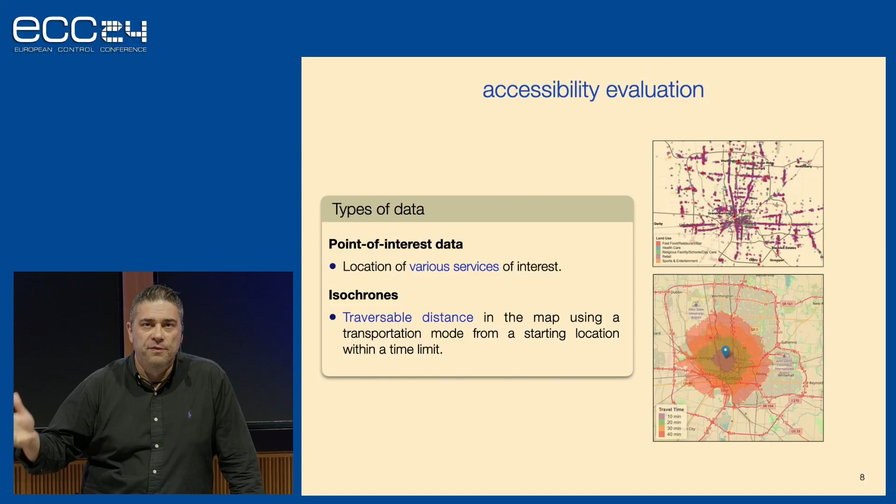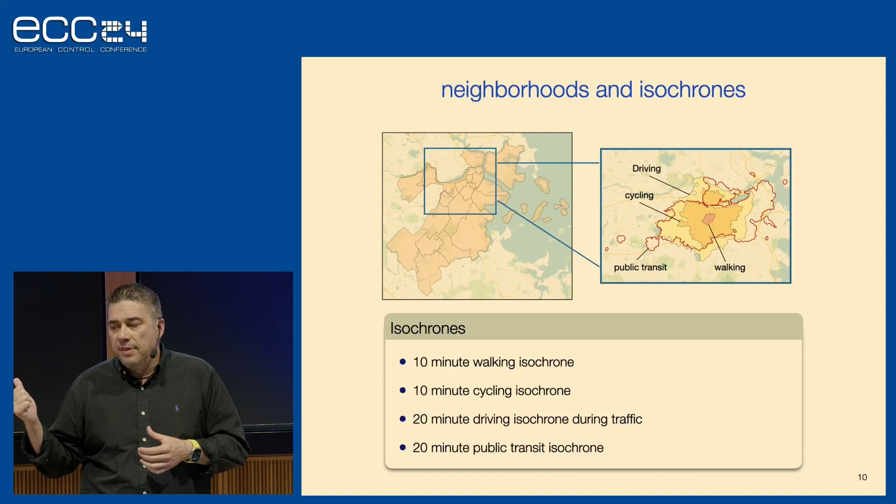For the walking and cycling that you can see in the map, we used a 10-minute threshold. For the driving and the public transportation, we used a 20-minute threshold. So this is a nice feature, and this is also the way that you can see how many services you can access with walking, cycling, driving, and public transportation. So that's the first step.

But that's not enough. What we're missing is that we have to enhance this information with some sort of cost and societal factors. We need to measure how much it will cost us to get access to these services within this time threshold and with this mode of transportation, and translate this into a sort of cost per passenger per mile. But again, this would not be enough, because if I know that I need to spend X amount of dollars or euros to use a taxi and get access to these services, how do I know that this is affordable for everyone in the community?

So we need to inject some sort of sensitivity in the pricing, right? And at the end, we need to prioritize the services. Not all the services are equally important. Medical facilities, financial services, employment, or schools should weigh more than entertainment activities, venues, recreational activities, or restaurants, and so forth. So with this in mind,

we introduce the so-called mobility index in a given transportation network, where essentially we have a script set M that includes all the modes of transportation: walking, cycling, driving, public transportation, you name it. And a script set S that includes all the types of services: medical facilities, pharmacies, grocery stores, restaurants, coffee shops, and so forth. And we also have a script set O of all the neighborhoods in a given metropolitan area, which mathematically we represent with nodes. We introduce the mobility index.

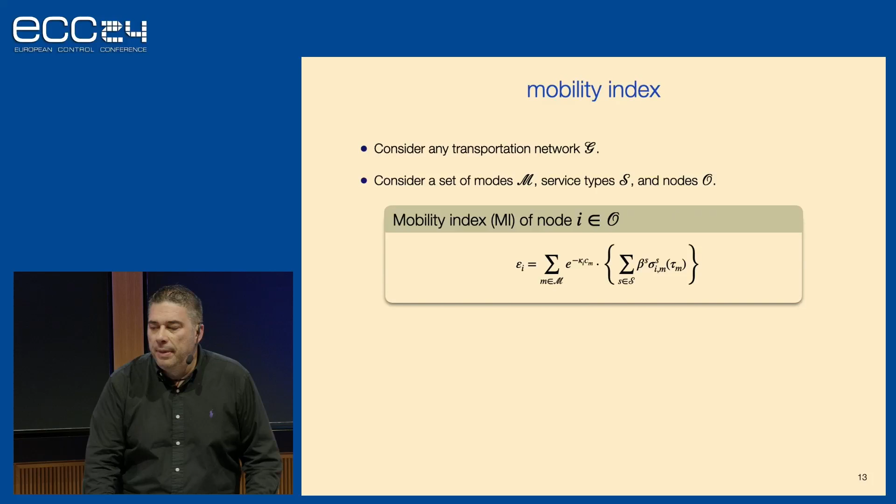So the mobility index will give us a notion of affordable accessibility, and I will explain in just a minute what I mean by that. First of all, the second term gives us the weighted sum of the services. The notation sigma_{i,m}^s(tau_m) is the number of services that we can access with mode of transportation m within the time threshold tau_m. Then we multiply this by beta_s. Beta_s is a weight that gives priority to one particular service versus other services. So if beta_s is higher, these particular services have higher priority compared to others.

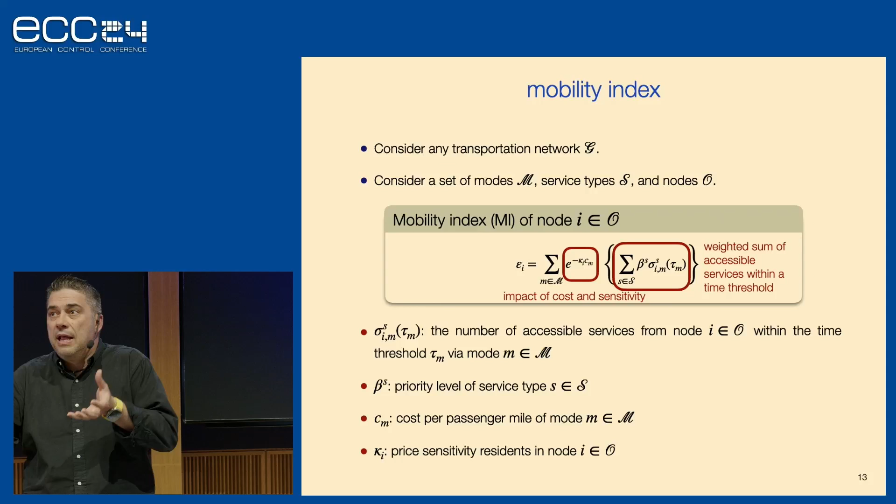And then we multiply this by another factor that gives us the impact of the cost. C_m is the cost of transportation m per passenger per mile, and K_i is the sensitivity of this cost to the residents in neighborhood i. So for example, if K_i is high, this will give a higher mobility index to those modes of transportation that have low cost. So K_i will promote low-cost transportation. And if you think about it, if the mobility index is high, it gives you the sense of affordable accessibility, because it promotes modes of transportation that have low cost but at the same time give you access to many services.

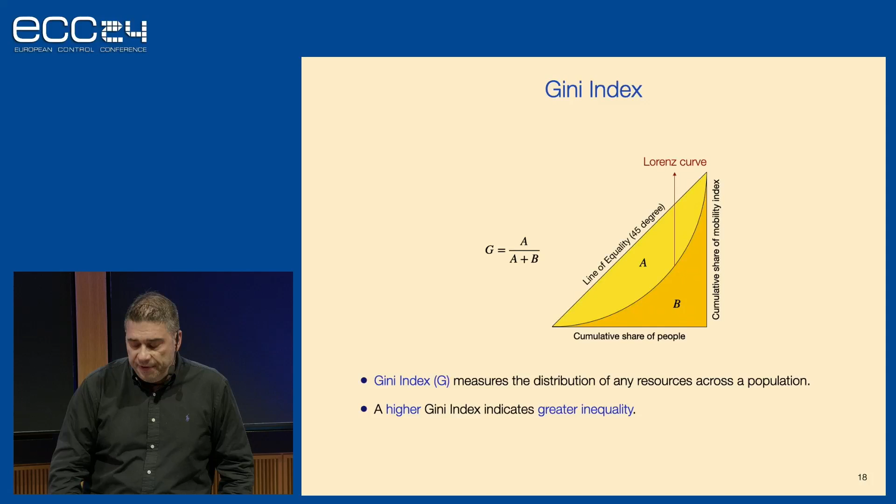So given this mobility Gini coefficient, we introduce finally the mobility equity metric, which is 1 minus the Gini coefficient, where essentially if the Gini coefficient is 0, it means that you have perfectly equal distribution of mobility index, which means that the mobility equity metric is equal to 1. If you have the opposite, you have 1 minus 1, it means that the mobility equity metric is 0. So with this approach, we capture the mobility equity metric, which, in summary, gives you the affordable accessibility as being distributed across a big metropolitan area.

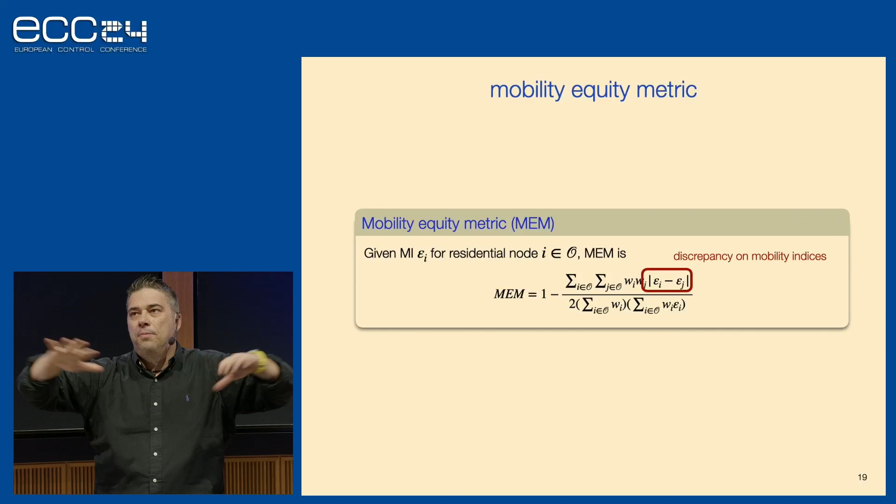We also built an online platform. Of course, it's not complete. This is work in progress. This is available online. You can visit it as we speak. Essentially, what we did, we captured New York City, Boston, and DC, and we tried to compute the mobility index metric and also the MEM. So you can go there.

The whole vision behind this platform is, first of all, to include as many cities as possible in the US, and perhaps later on other cities in other countries. But we envision this to be kind of a tool for city stakeholders, which they can go and play around with the different metrics of mode of transportation, cost, and see how they could potentially make some informed decisions about the different modes of transportation. So as I said, this is a work in progress. We hope to have it done by end of the year. And of course, I will promote this in social media so that you guys can get informed about this.

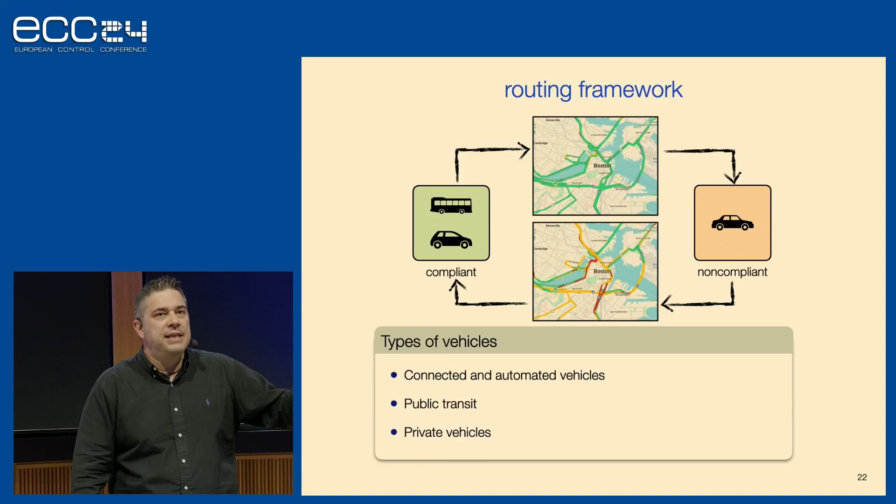public transportation. And non-compliant vehicles, vehicles that we can perhaps suggest some routings to, but they can completely ignore, would be privately owned vehicles. So given this, you can formulate a problem and try to optimize the routing with the objective to maximize MEM, right? So this is another one of the potential directions that somebody can take using this metric.

So to conclude, the whole idea is to come up with a metric that can capture affordable accessibility fairly distributed across a metropolitan area. We did some case studies to see how this metric captured this, of course, backing this up with the perception of other cities. And we are building an online platform that can help us see the picture of the city. Unfortunately, as I said multiple times, we don't have a way to compare MEM and say this is a good metric. We just used rationale to build up this metric based on aspects that make sense. But we are so looking forward to your feedback.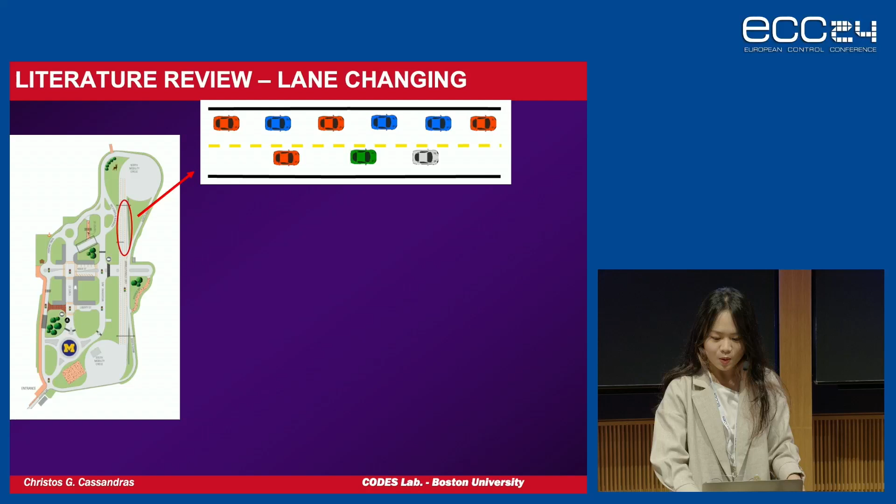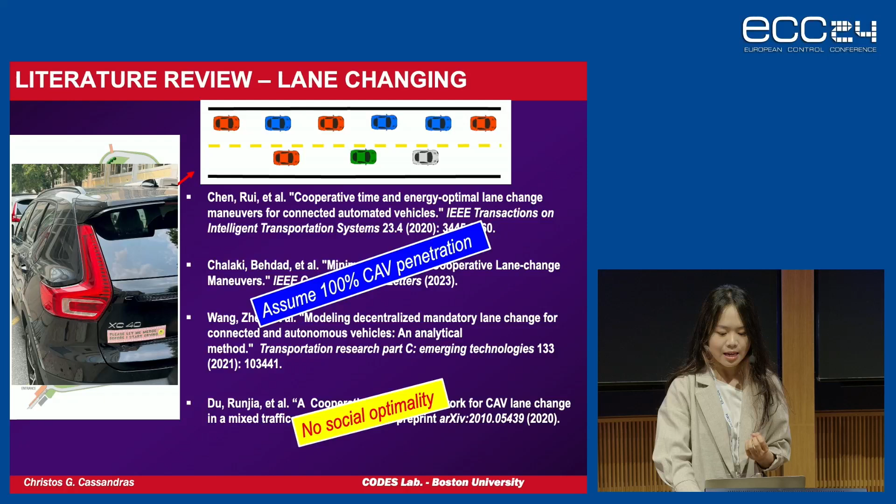So we focus in this work on lane-changing behavior as a typical application to address the importance of cooperation. So as you can see in this real picture, "please let me merge before I start crying," in the real world, we all have times when we need some cooperation to achieve this lane-changing maneuver. And many previous works focus on such maneuvers as listed here. However, some of them assume 100% CAV penetration, and some achieve no social optimality.

So it's true that introducing CAVs to our existing transportation network can improve safety and reduce congestion and energy consumption. But all these benefits are shown based on a big assumption of 100% CAV penetration. And it's safe to say that it will take at least several decades for this to be realistic. So therefore, incorporating human-driven vehicles, HDVs, into our analysis is necessary. So that's why we call it mixed traffic.

So there are 3 ways to go for the mixed traffic scenario: perception learning for better HDV models, safety prioritization, and cooperation compliance mechanisms. So in this work, we decided to study mixed traffic in the lane-changing maneuver as a common conflicting area in the transportation network, in which we want to develop a cooperation compliance mechanism while enhancing safety.

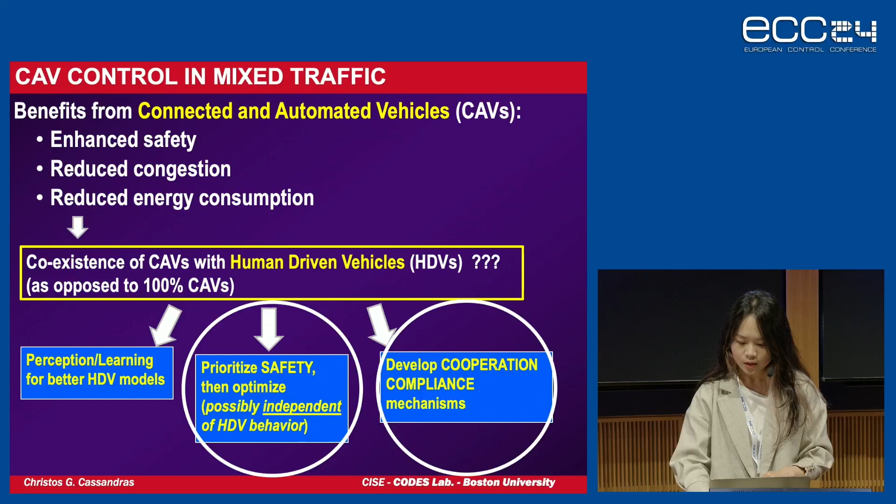But specifically, in a mixed traffic scenario, we will consider triplets like this, where a CAV C drives in the slow lane while it wants to merge into the fast lane, and there is an HDV in the fast lane following a CAV. So we consider this setting because this back vehicle is critical for this cooperation. If CAV 1 is at the back of the HDV, it makes this problem much simpler because 2 CAVs can cooperate with each other.

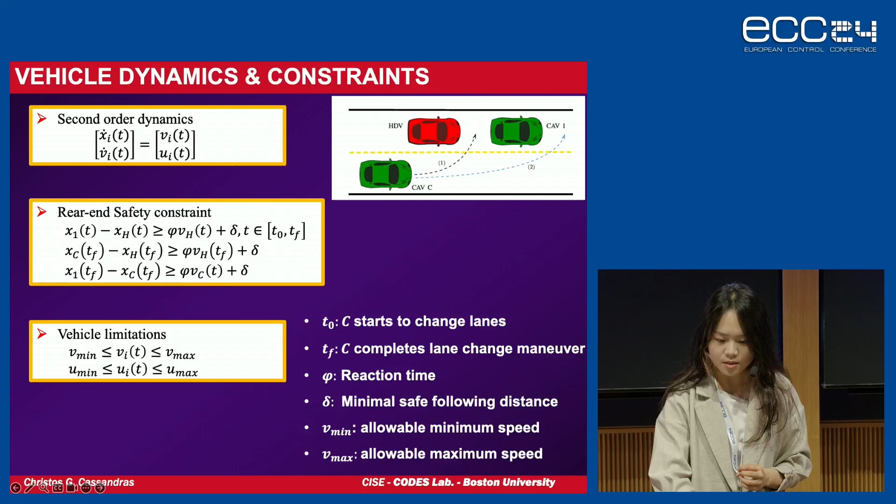We start with case 1, where CAV C wants to merge ahead of the HDV. This is pretty challenging because HDVs are uncontrollable and they may not yield to CAVs. So we divide the whole process into 2 phases. The first is for CAV C to accelerate to reach H, and we denote the time that HDV and C are parallel as T1. Phase 2 starts from T1, and we solve a lane changing problem by solving a bi-level optimization problem while estimating the HDV behavior. Now we explain in detail how these 2 phases function.

First, for phase 1, we want to find the optimal trajectory for C to reach H, while we find the optimal time T1 as defined earlier. For that, we solve an optimal control problem that optimizes the travel time, control, and speed deviation, while we want the terminal positions of the 2 vehicles to be the same.

But it can be infeasible when CAV C doesn't have enough time to catch H. In that case, we can simply test the extreme case by speeding up with the maximum acceleration. Or CAV 1 can help CAV C by decelerating to force the HDV to slow down. And we evaluate the energy and speed disruption for both vehicles in this case. So in summary, we find the minimum cost of these 3 ways, and we calculate the optimal end time and optimal trajectory.

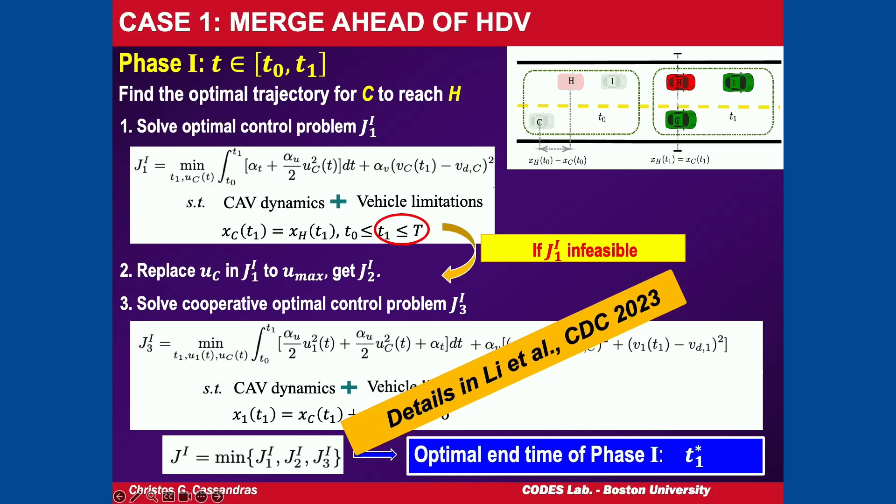We note again that this time T1 is also the time that the HDV is aware of the intention of the CAV and starts to behave accordingly. Starting from this time, we enter phase 2 and start to calculate the true cooperation control. The ideal trajectory for CAV C assumes that the HDV drives at a constant speed until TF, which we denote as the terminal time of the lane changing behavior. But we know that this is not possible in practice.

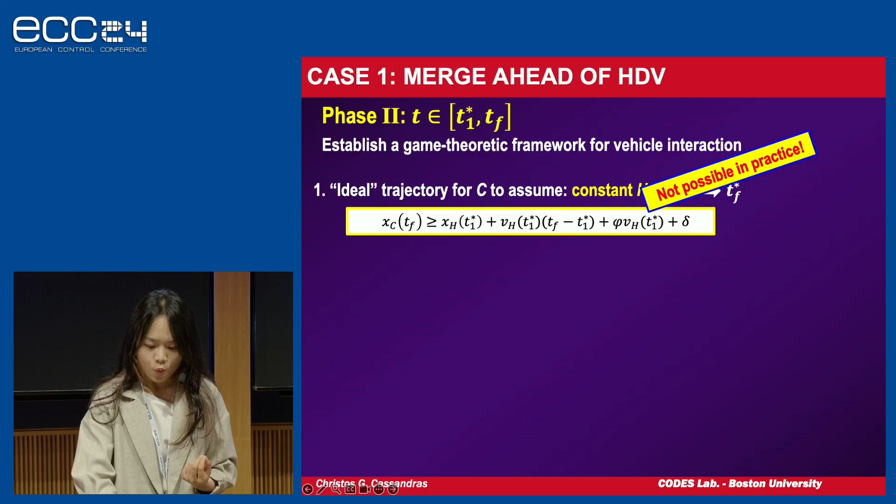So we formulate a bi-level optimization problem with vehicle interaction, and we solve it with the iterated best response (IBR) method, as you can see in this flowchart. We initialize with the trajectory from the ideal case, and based on that, we solve an optimal control problem for the HDV by assuming that human drivers consider 3 factors: the collision risk, the energy, and traffic flow disruption when they decide how to drive. Then the optimal trajectory is calculated and transmitted to CAV C.

Then CAV C can respond to it, calculate the optimal trajectory again, and transmit it to the HDV and CAV 1. They solve a similar OCP, except the CAVs don't consider the collision risk because they are CAVs. All these procedures iterate several times until converging to a final best trajectory.

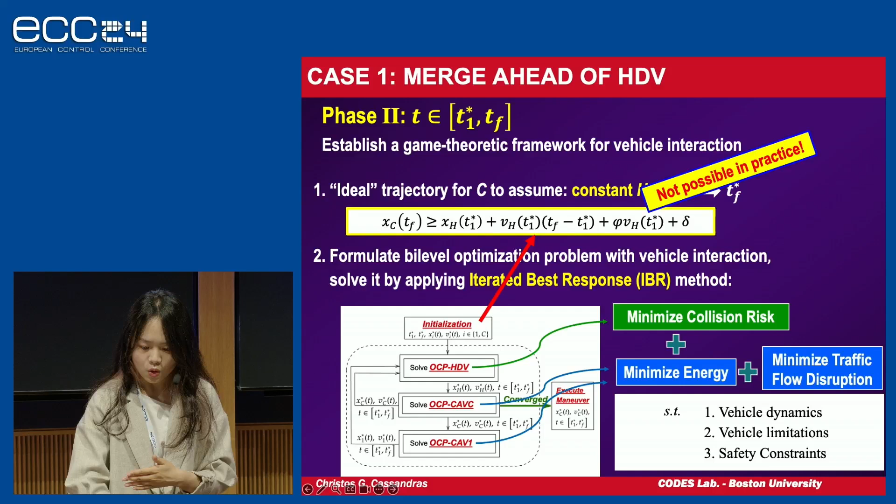We detail the math formulation on this page. For the HDV, we assume that the driver wants to minimize the energy, as you can see, the control, the speed disruption, and the collision risk. And we represent this collision risk by a risk function S.

And this function is decreasing as the distance gap between two vehicles increases. In our work, we use the sigmoid function for that, but it's actually learnable for each driver from their past driving behavior. For example, some drivers are more aggressive than others, and they are willing to take a smaller distance gap.

And we have a similar OCP for two CAVs, except their terminal state and safety constraints are different. In terms of the convergence, we declare that this IBR process would converge in finite time, and this is proved theoretically in this work. Actually, in our test, the average iteration for the convergence is just about 4 or 5 iterations, so it's pretty controllable. So until now, we introduced how we can control under case 1.

Then we will start case 2, in which the CAV-C wants to merge ahead of CAV-1. This is an easier case since the importance of HDVs is downgraded. By applying this choice, the safety can be guaranteed since CAV-1 is cooperative, and we don't need to consider the behavior of HDVs, which makes our calculation simpler and it can actually be solved analytically. But it will consume more travel time because the CAV-C takes more time to get ahead of CAV-1. So we have similar formulations for case 2, and it can be solved analytically again.

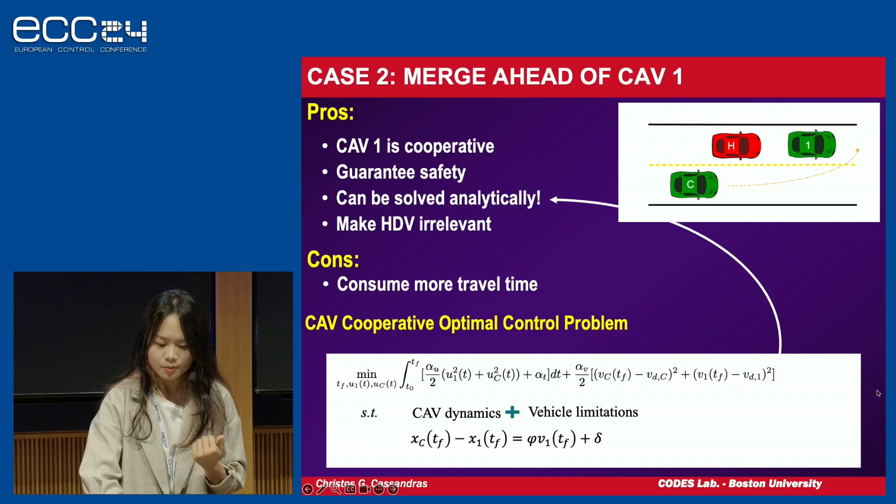So until now, we have detailed the controls for both cases. The possibility of 2 options makes us wonder which to choose, where to merge. The most reasonable way is to calculate the cost of the 2 choices and choose the one with the lowest cost. But we can find an even easier policy by observing their cost formulation. We call it the optimal threshold policy.

Firstly, we denote the distance between the CAV-1 and HDV as D, and find that the total cost for merging ahead of HDV, case 1, is independent of this D. But the cost of merging ahead of CAV-1, the second case, is monotonically increasing in D due to the long travel time and therefore acceleration and speed change. We have proved that analytically in our work, which is also in accordance with our intuition. Therefore, we can have a threshold theta: if D is smaller than this theta, we choose to merge ahead of CAV-1, and otherwise we choose case 1.

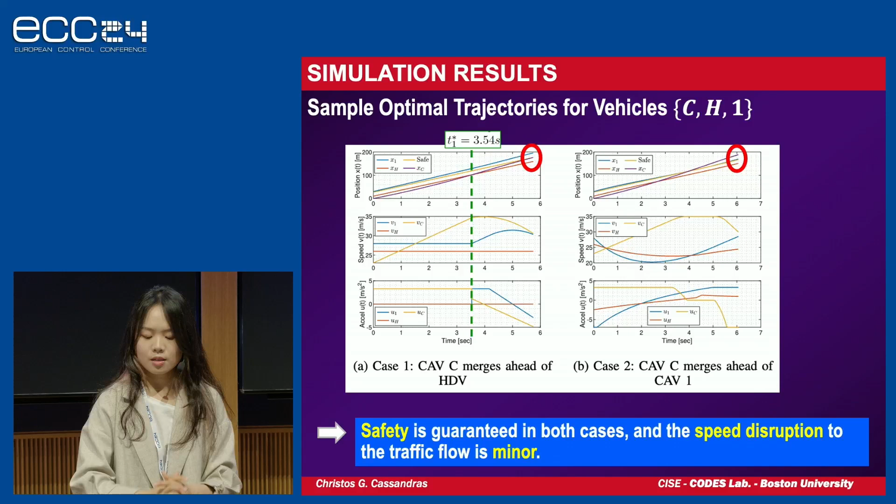We then compare the control in the mixed traffic scenario with the 100% HDV environment case. We state it as a baseline, which is basically using the standard SUMO car following model. And we find the total cost, the disruption, and maneuver time are improved using our framework.

So up to now, we have formulated a lane-changing problem in a mixed traffic scenario, where the HDV would behave in response to the surrounding environment for its own purpose or efficiency. But we now start to wonder, what if instead of passively responding, the human-driven vehicles can actively choose to cooperate with other CAVs to create some social compliance? So here comes our second part, the cooperation compliance.

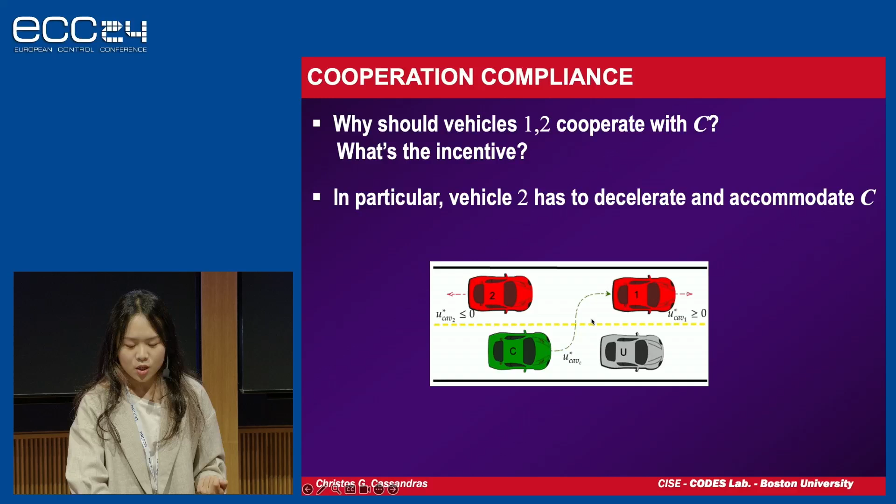To achieve the cooperation, the first question is why would they cooperate? What's the incentive for this cooperation? Specifically, if we consider the scenario in this figure, where this CAV-C wants to merge between these two red vehicles, why would vehicle 2 want to decelerate and make some room for CAV-C? To address this problem, we use a concept called refundable toll that has been brought up in many previous publications.

And the key idea is that every driver owns a digital wallet, and users commit a number of tokens at the start of each given period, such as they pay a toll. And these tokens are virtual and can only be used within some given market, in our example, the transportation market. And this is fully refundable as long as the user complies with a set of rules.

And these rules can be different in different scenarios. For example, if we're considering a routing problem, when a social planner provides some reference routes, the rule is just to follow the route. But in our lane changing case, the rule is to accommodate lane changing from a vehicle in the slow lane when such request is received.

So in order to evaluate how much the rule is satisfied, we first define a variable for compliance behavior score, which is chosen to be inversely proportional to the deviation between the actual states of agent I and the reference states by the social planner. And to make it simple, we make it binary, which takes a value of 1 if the user complies at time k, and takes value of 0 otherwise. But actually, it can also be a continuous variable indicating some partial compliance.

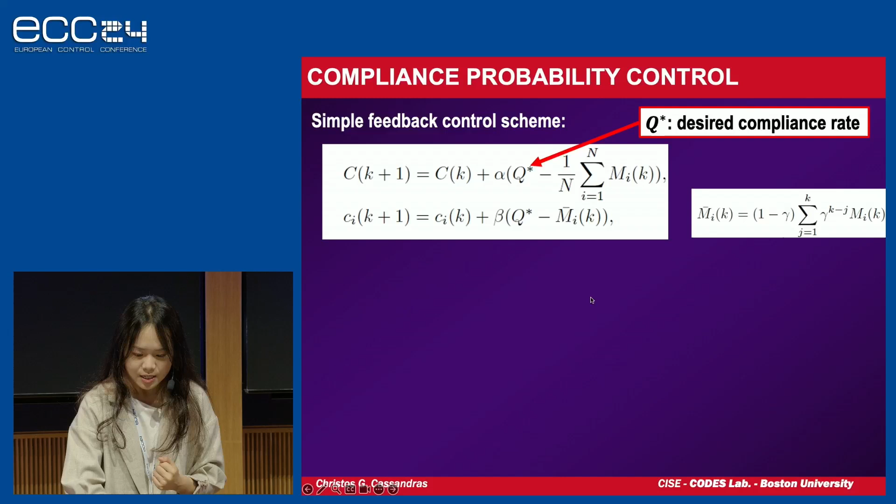And the compliance behavior score of agent I, this MI, is actually measured based on some error, which is the discrepancy between the reference state and the true state. So the error affects the compliance behavior negatively, proportional to some maximum tolerance of state error. And this is intuitive because when we have higher error, we have lower compliance behavior score. So with the updated compliance score, we can update the global and local cost.

And then the behavior of the non-compliant agent would be affected by those costs because they're cost sensitive. And the level of effect is represented by an attribute called compliance probability that we will introduce now. So this is the compliance probability. It is a non-decreasing function of 3 components: the initial proclivity for I to comply, and the global and local cost. And we assume this function P to be piecewise linear in this format, but it actually can be different for each driver, indicating their driver preference and their sensitivity to cost. And it actually can be learned from their demographic data and from their past driving behaviors.